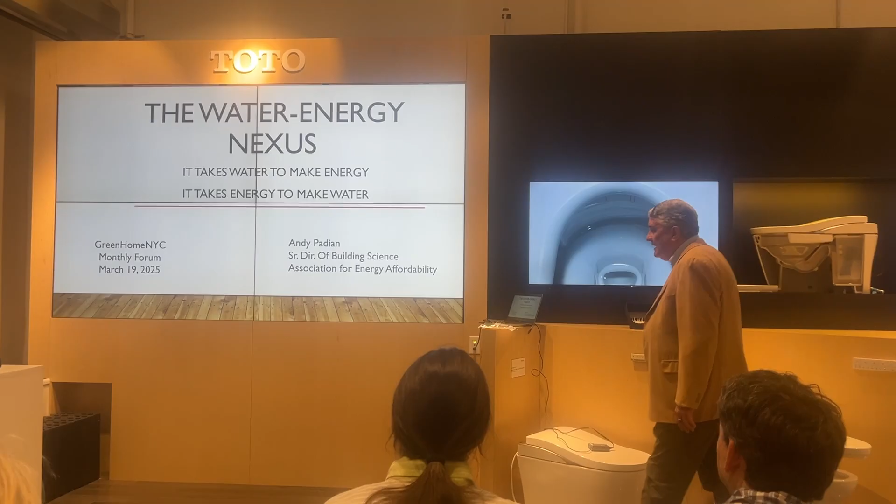I'm going to do a lot of stuff tonight, going at about 100 miles an hour. This is one of my favorite presentations to do because the connection to water and energy is very important. This isn't a class about water efficiency in buildings, although I'm going to talk about it. And it's not a class about electricity, but I am going to talk about it. I'm going to talk about where those merge all over the place.

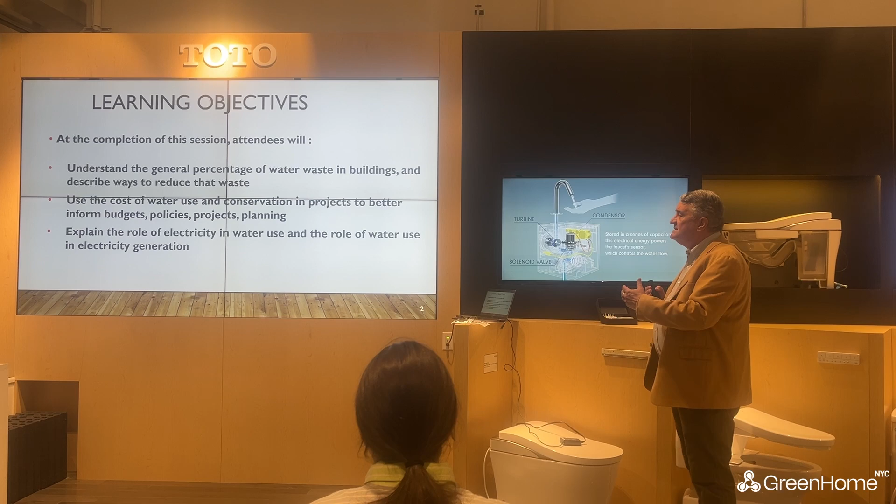You're going to understand how much water waste there is in buildings tonight because I will talk about water, the cost of water, conservation, and how to better inform budgets, policies, and projects and planning. I don't ever see water addressed in refinancing, and it's stupid. I'm going to explain how electricity is involved in water and how water is involved in electricity. And I'm going to start making you really depressed and very guilty so you know exactly how much water is used in every single thing you use in your life.

I've been in the field for about 20 years and I hold the world record for multifamily ASHRAE Level 2 audits. No one's done more than I have. I've thrown the gauntlet down and no one tries to pick it up. I do presentations and articles all over the country. I'm speaking at the Building Performance Conference in New Orleans, Louisiana next month. I helped create most of the Multifamily Building Performance Institute trainings and certifications, and I train on them all the time. I'm a huge proponent of energy and water efficiency.

I always like to find out who's in the room. So who are you? What do you do? Quick start, name, rank, serial number. Go.

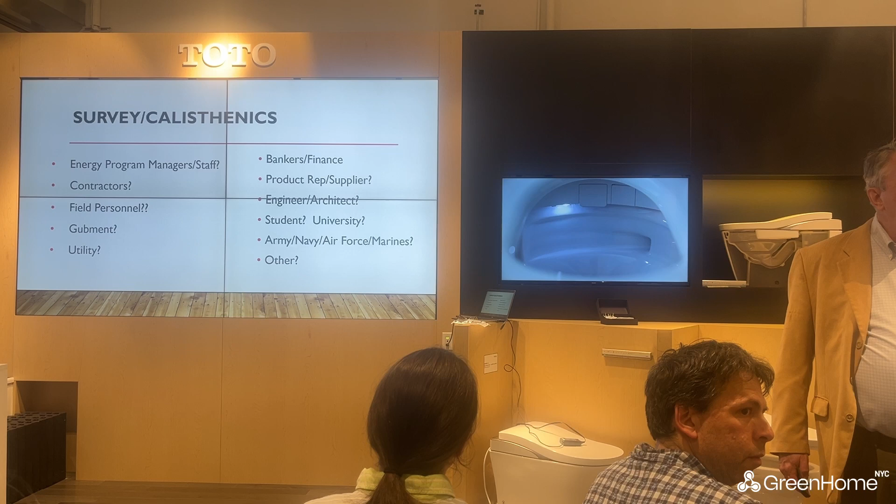Gregory, project manager. Lorraine Julio, HVAC contractor. Lydia Reynolds, associate manager of Clean Pipe, Climate Justice, and Climate Innovation. Program manager for the County. Gabriella Rada, energy engineer, currently on the grant and transitioning to EA as a sustainable specialist. Mom and Kelly Carpini, I work for an asset manager that focuses on ESG. Eli Greenberg with Kelvin Systems, formerly Radiator Labs, we decarbonize buildings. Dallas Panier, I work for the Association for Energy Affordability, energy efficiency for affordable housing. Katya, government consultant. Scott DeVere, principal of DeVere Architecture. Jill Baker, I write for Reuters. Monsi, sustainability strategy at a transportation company. Eric Natch, student at Hunter College, working in environmental planning.

Anybody former Army, Navy, Air Force, Marines? The number one training area for sustainability in the United States comes from the Army, the Navy, the Air Force, and the Marines.

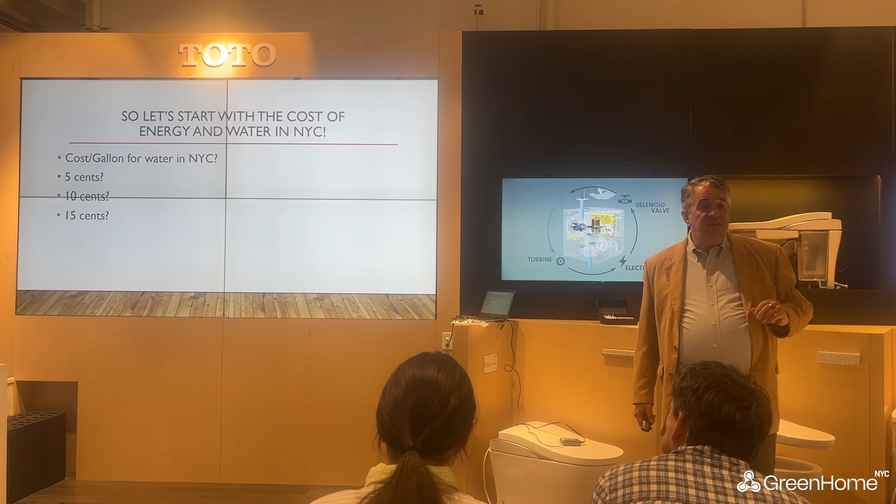So let's start with the cost of energy and water in New York City for all you sustainability gurus. What's the cost for a gallon of water in New York City? Is it 5 cents? 10 cents? 15 cents? How many think 5 cents? How many think 10 cents? How many think 15 cents? Survey says 1.67 cents for a gallon. Why don't we know that off the top of our heads?

Okay, let's go to a therm of gas in New York City. Does it cost 80 cents? How many think 80 cents? How many think $1.20? How many think $1.50? I've seen both answers. Okay, how many think $2?

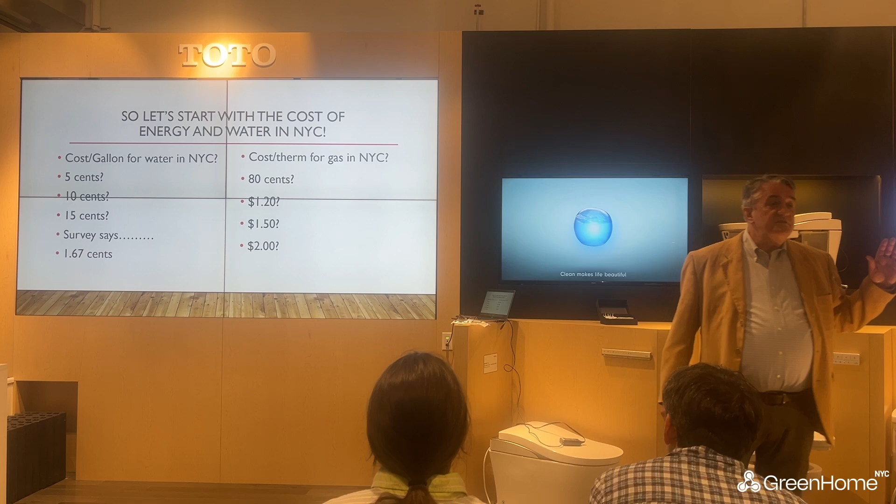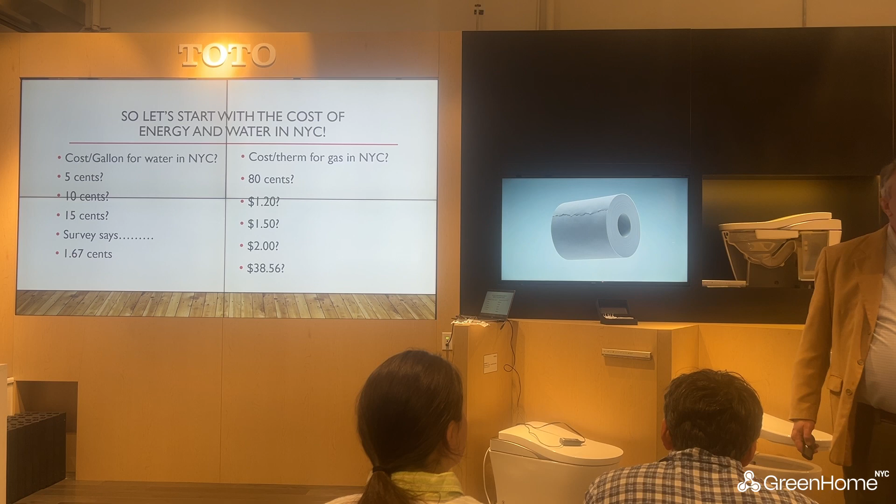How many think $38.56? The correct answer is all of the above. It's 80 cents if it's interruptible gas in Brooklyn, $1.20 if you're a multifamily contractor, $1 if you're a multifamily owner, and $1.50 to $2 for a residential building. I use 1 to 4 therms of gas every month for my little gas stove, and no matter how much I use, I get charged $38.56. So on those months when I use 1 therm and don't cook much, gas is pretty expensive.

The cost per kilowatt hour of electricity for a single family home or apartment in New York City is... how many think 15 cents? Get out of the solar business. I don't know what you're talking about, I haven't been in New York City for a while. How many think 20 cents?

Do you pay an electric bill in New York City? No, I have solar on my roof. But that's what I thought it was anyway. How many think 25 cents? Do you have a Con Ed bill? You ever read it? Not close.

Okay, so you work for an energy hub. Okay, 30 cents? Survey says? What, you think 30 cents? No, I'm sorry, it's 35 cents. 35 cents, very good. It's very good for you to give the answer at the end that's correct. Okay, that's good.

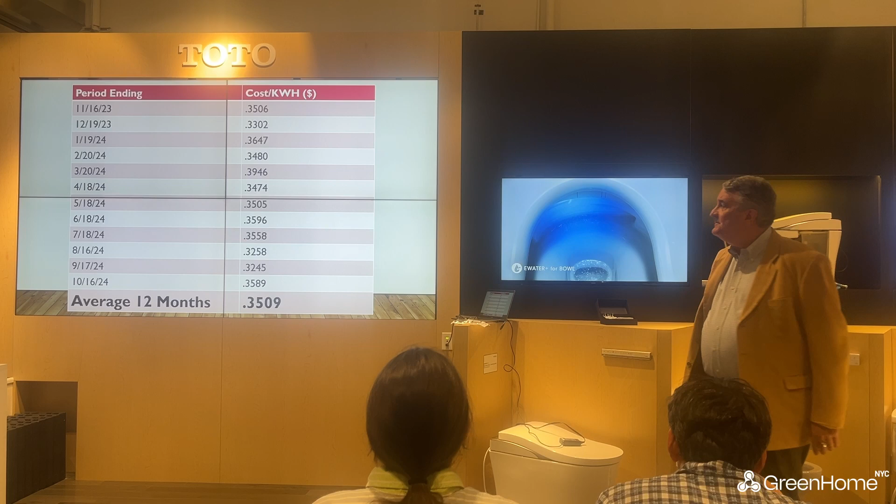So these are my electric bills for the last year and how much I paid per kilowatt hour, taking off the meter charge, which people tell me I can't do. If I add the meter charge, it goes up another 10 cents, because I don't use that much electricity since I'm an environmentalist. I'll get more into that in a minute. So electricity at 35 cents a kilowatt hour.

Harris, you were telling me that somebody you know got a heat pump and they said, oh my God, my energy bills went up by... I don't know what the net increase is, but they're paying $300 a month for heating.

That's because electricity at 35 cents a kilowatt hour is the same as gas at $10.35 a therm. It's the same as number 2 oil at $13.85 a gallon. Just saying, our energy's kind of expensive and we don't pay attention to it. And some of the people preaching electrification, which is different from decarbonization, won't tell you these numbers.

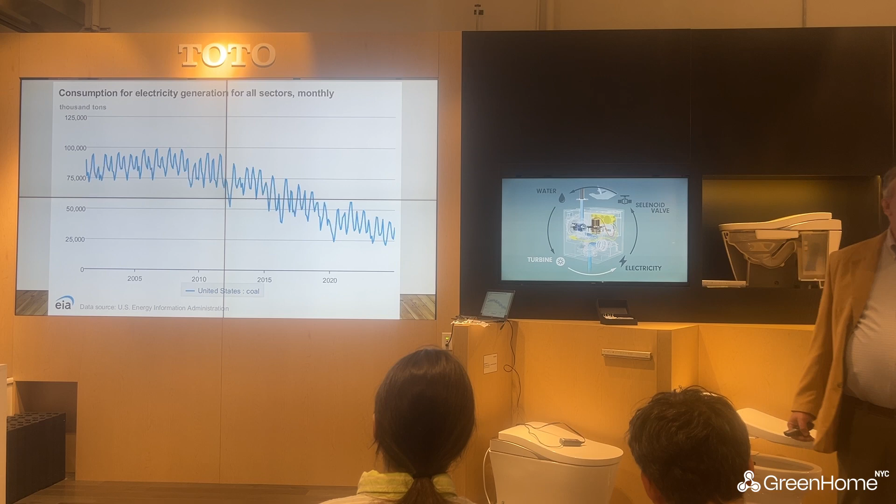So electricity over the last 25 years, overall usage has been going down nationally. I picked this up from the U.S. Energy Information Administration this morning. We're using less electricity because of efficiency. Huh, who knew?

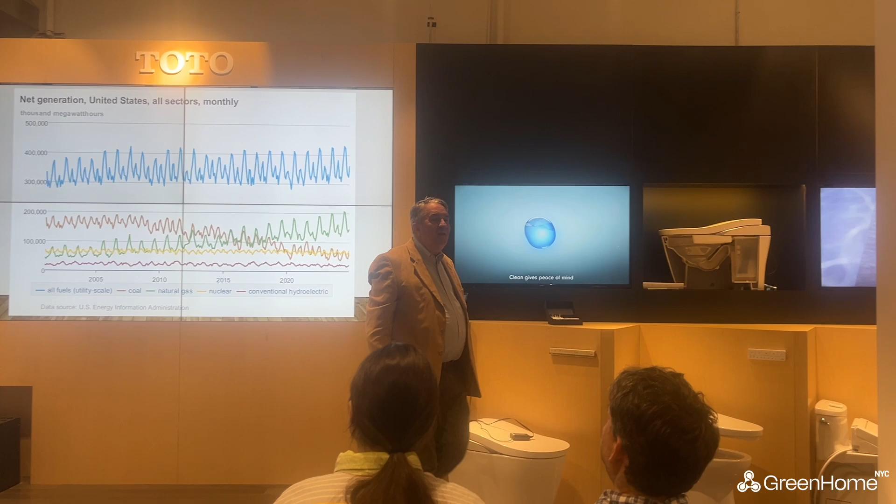But in the United States, if we look at all fuels - coal, natural gas, nuclear, hydro - oh, we're not really a green grid, are we? No, but everybody tells us the grid is greening. Did anybody know the contract to bring hydroelectric power from Canada to New York City was canceled? Oh, so we're not going to get that cheap hydro. And by the way, the Canadians are really pissed at this guy named Trump, and they're saying all the hydro they give us right now, which makes my electric bill 35 cents a kilowatt hour, they're going to kick a 24%, 25% kicker on it. So my electricity is going to go from 35 cents a kilowatt hour to 50. Because the guy in Washington pisses off a lot of people.

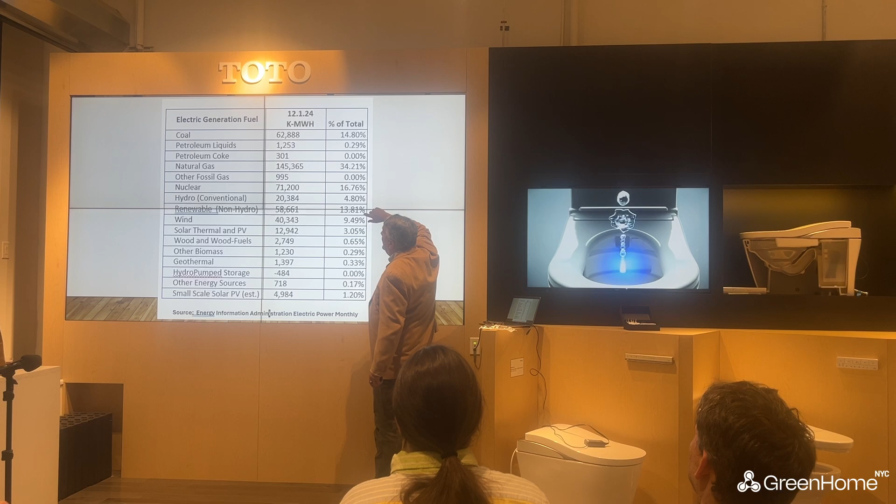Okay, so as of today, the Energy Administration says coal is 14% of our electricity, natural gas is 34%, nuclear is 16% - that's a big chunk. Non-hydro renewable is kicking up but it's only 14%. Wind is 10%. These are good numbers to know, but we're still under 25%. That isn't good. They've been climbing the most ridiculously of all of them. Small scale solar PV is 1.2%.

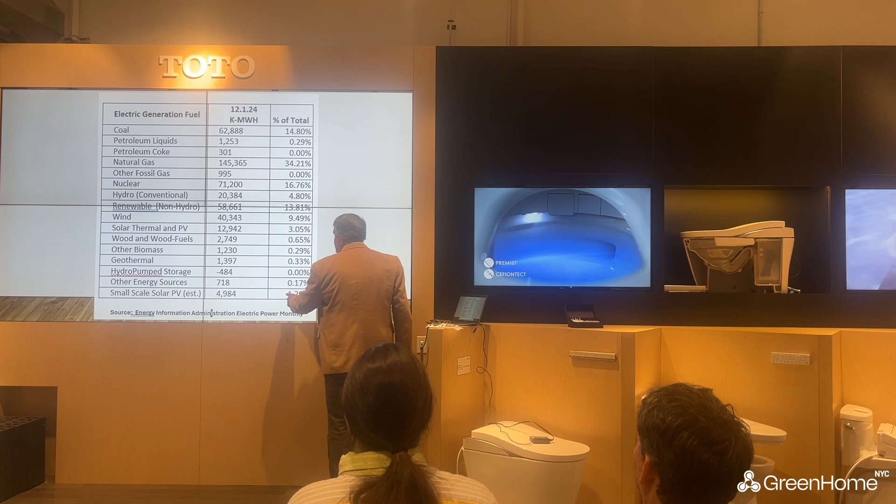So if you go to the Department of Energy website today, you can't get any information from the Department of Energy, but you can hear the speech that the new head of the Department of Energy gave to the new employees. And I can summarize it in 2 sentences: drill, baby, drill, more nukes, less kooks. And that's it. Efficiency was never said.

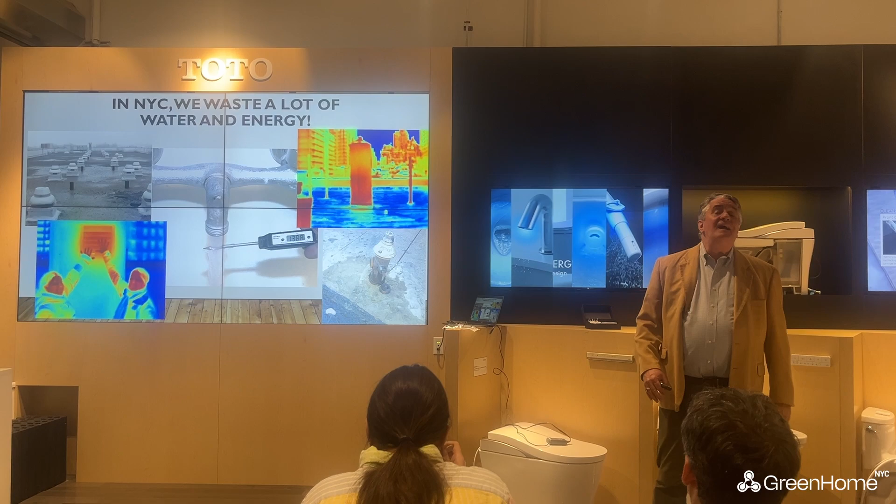Alternatives were never said. So in New York City, we waste a lot of water and energy. We have ventilation fans on the roof dumping warm air into the atmosphere. We have dumbwaiter shafts, which people tell me they shouldn't seal on top of our old buildings, that are basically heat vents. We have water coming out of the tap at 138.8 degrees Fahrenheit. And open hydrants - see them all the time, not just in the Bronx where I work, but on my street in Hell's Kitchen where I live.

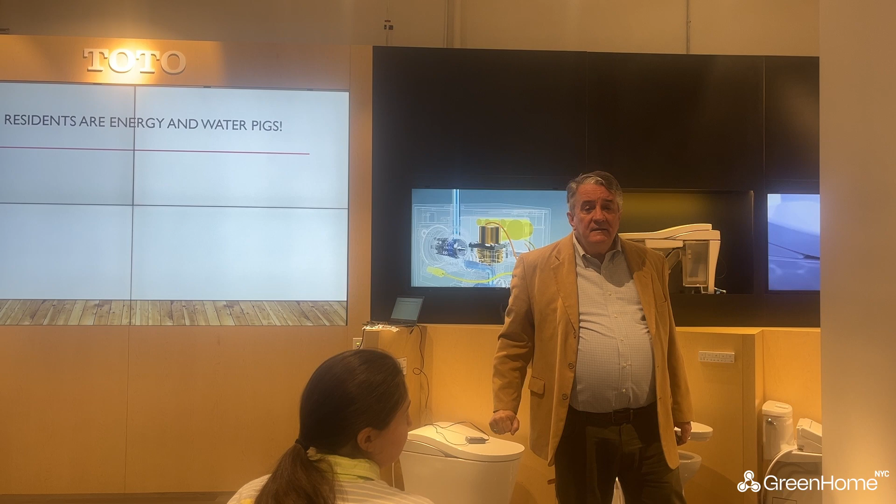We're pigs. Anybody know how much electricity they use each month? Nobody looks at that. How much? 240 kilowatt hours. What the hell are you running? 5 refrigerators? Electric hot water heater. Oh, that's it. Got to get rid of that. Okay.

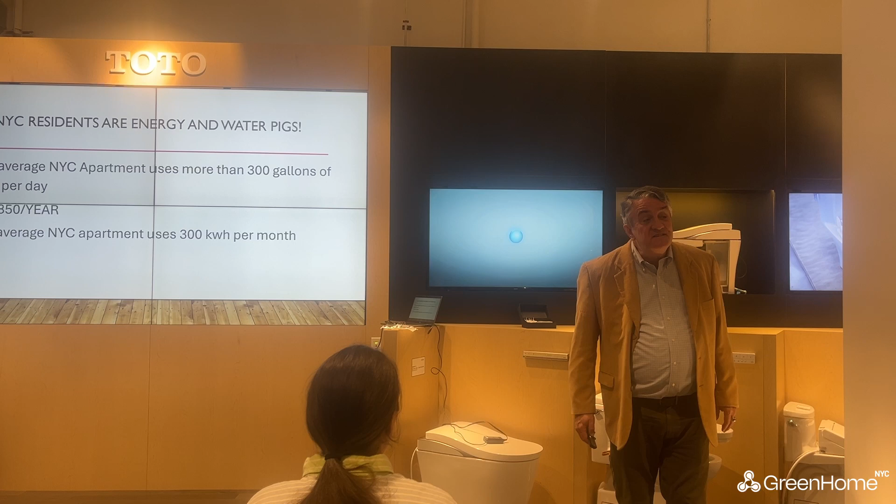The average New York City apartment uses 300 gallons of water each day, that's $1,800 a year. The average New York City apartment uses 300 kilowatt hours per month. I never use 100 because I shut stuff off. And I unplug my router because your router uses as much electricity as a small Energy Star refrigerator. That's why the cat likes to sit close to it. That's 300 kilowatt hours a year, that's $1,500.

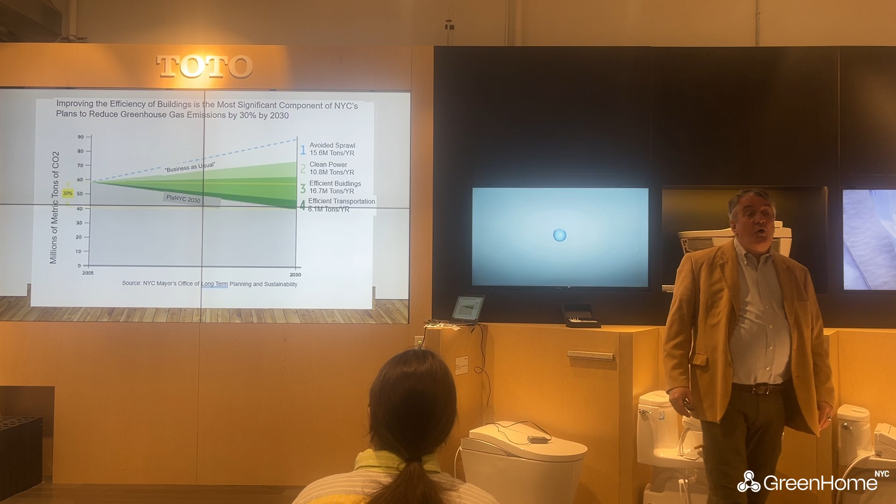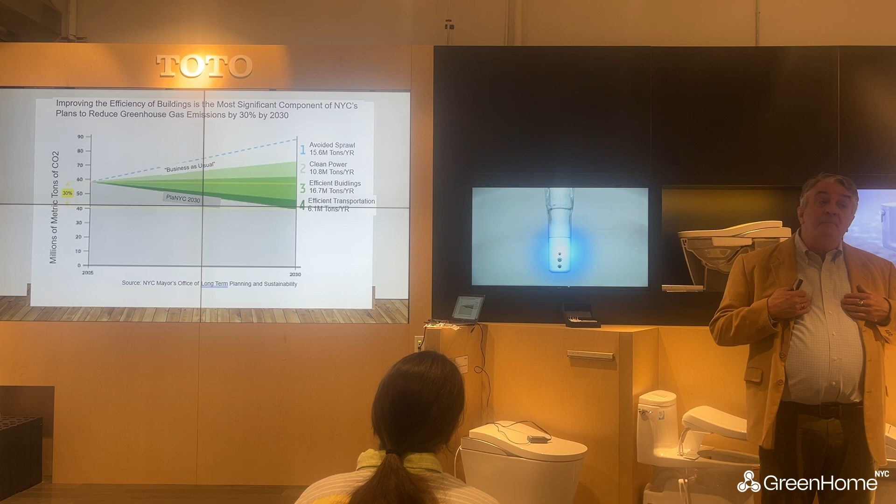But the mayor's long-term planning and sustainability office said that efficiency is the most important thing about getting to decarbonization. Unfortunately, in Albany, we've got people that have introduced a bill to preclude us from giving gas to buildings that currently burn oil. The number one way we reduced carbon in New York City over the last 10 years is getting off of oil. But the Albany enviro people, I'm an environmentalist, but don't tell people they have to get off gas until you give them cheap electricity, because it's too damn expensive.

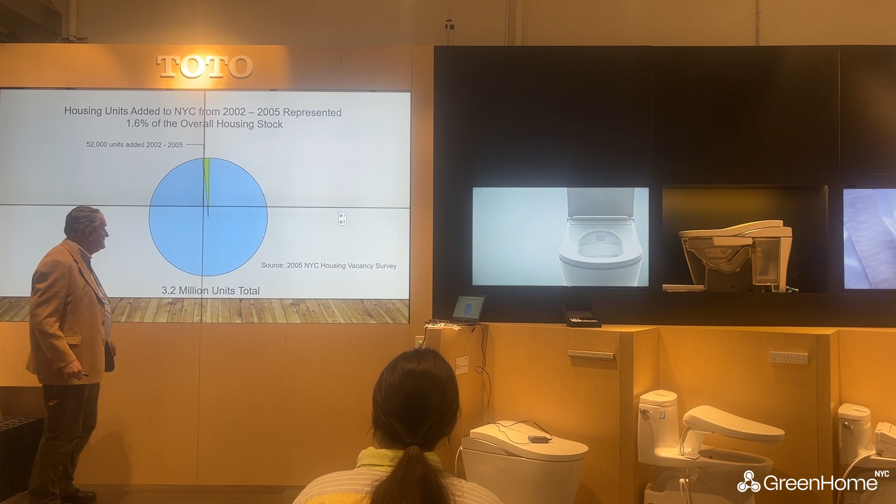People tell me, oh, but we're building super efficient buildings. From 2002 to 2005, we added 52,000 units of housing. There were 3.2 million total. And the Department of City Planning says from 2005 to 2030, the new stuff we add is only going to be 7% of our housing. Who is investing in retrofit? Who is investing in rehab? Answer, no one. Everybody tells me this is a LEED building, it's going to be fabulous, it's going to be fantastic.

Well, the tallest LEED building in the city, the Bryant Park building on the corner of 42nd Street and 6th Avenue, is the Bank of America building. It's LEED Platinum. It's also the 4th highest user of energy per square foot of any building in the city. So LEED doesn't do its job. It's about bike racks and solar panels. Yeah, it's a bunch of crap.

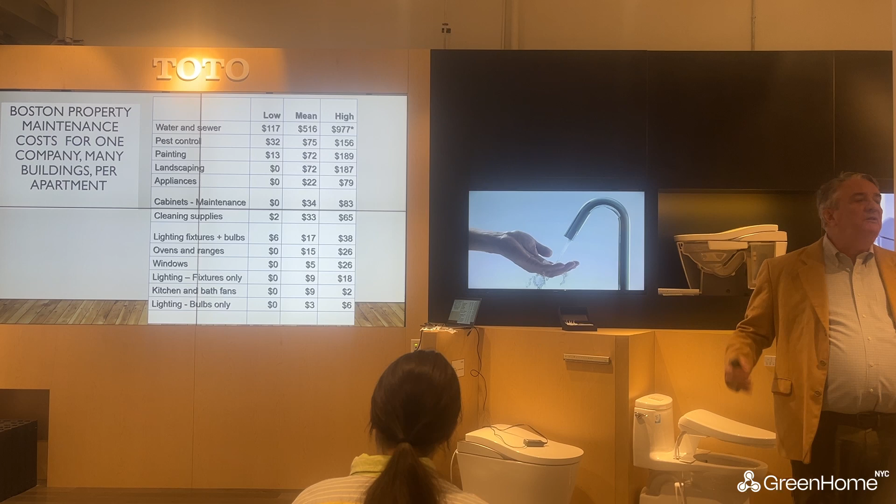A few years ago, a friend of mine who was a health and safety expert went to a managing company in Boston and asked how much they pay for everything in their buildings, per apartment. They found the low and the high is about a 7 to 20 to 1 difference all the time. But she wanted to look at water, pest control, painting, landscaping, to see if people were spending a lot of money on that, and whether health and safety problems and asthma were worse in those buildings. You know what she found out?

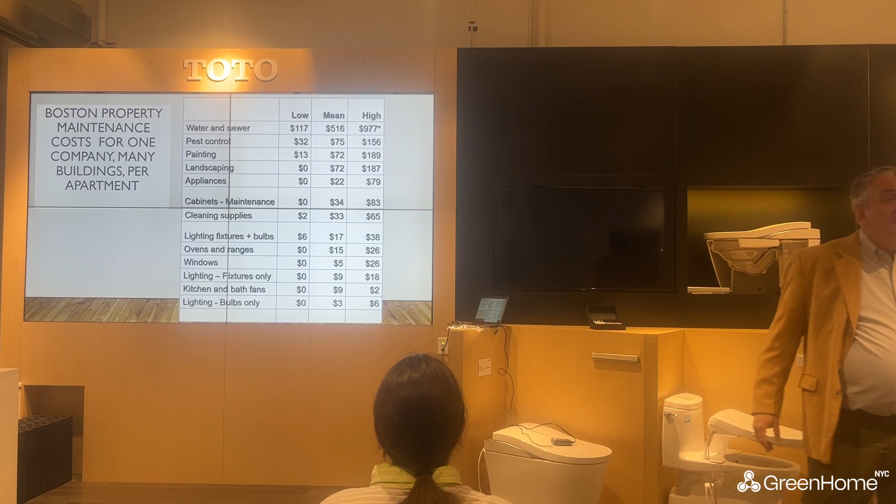In buildings, the difference in water costs was $117 to $977 per apartment per year. This was 15 years ago, and she's a health and safety expert. So she's walking around the building with the super at the high-cost building, and there was a hose in the backyard running 24/7. She said, hey man, maybe you should shut that off. He said, oh really? Yeah, that's a good idea. These are the things we're missing in buildings.

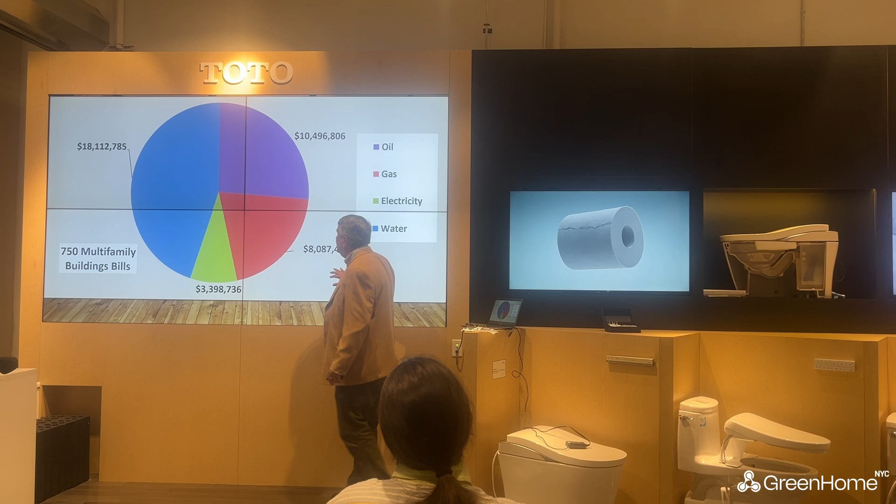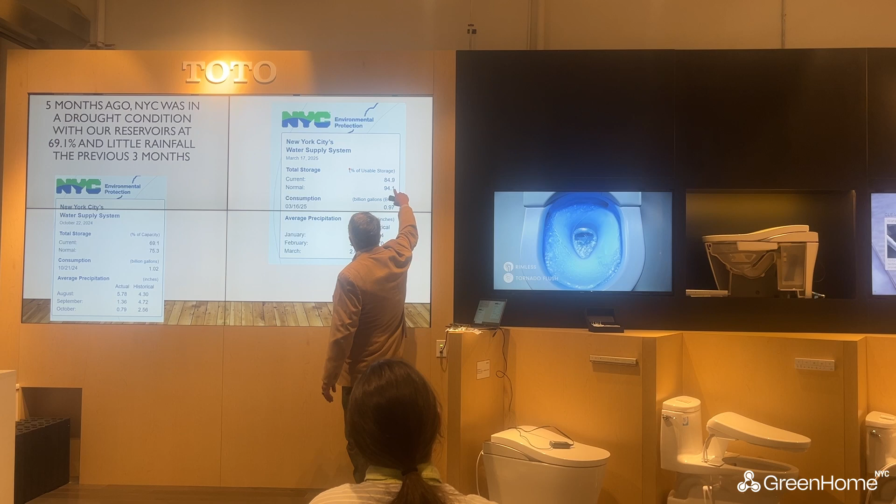5 months ago, New York City was in a drought. I did this presentation, and we were at 69% of capacity. But every time I went to a restaurant, they gave me a glass of water. Pardon me, WTF. If it's yellow, let it mellow. If it's brown, flush it down. Reduce your water use a little. Okay, now our current level is 84, but it should be 94. I'll talk about our reservoirs in a minute because they're an engineering marvel. But rainfall is 43% down from what it normally is. This is bad, and we're not saving water.

The mayor made a big stink about it a few months ago. I have a community garden, and because of the drought, he wouldn't let me use my charcoal grill. Yes, it's charcoal, I'm very sorry. It adds terrible things to the environment, but the food that comes off it is really good.

So the water and sewer fees, we're charged $3.81 per 100 cubic feet. That's about 750 gallons. But you also get charged sewage costs, and that's 159% of that. So it ends up being about $6 per 100 cubic feet or 750 gallons. I'm sorry, it's $9.80, or 1.3 cents per gallon for water.

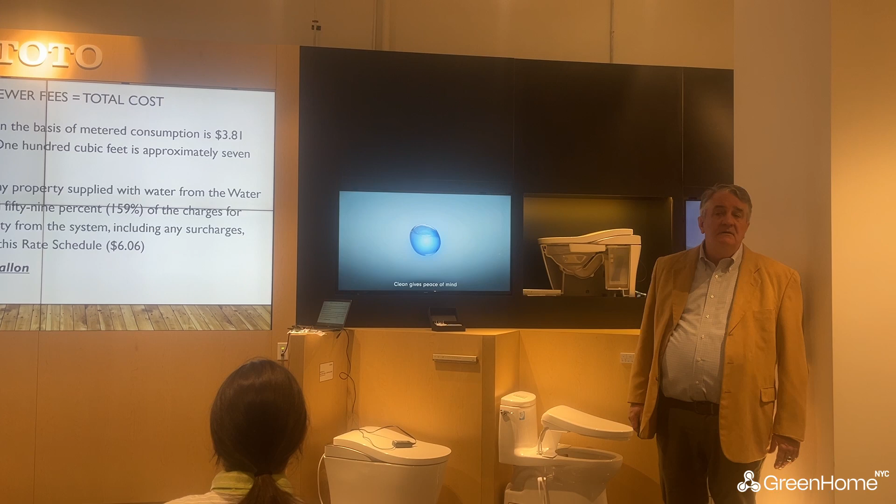And y'all go out and buy water, how many people have a bottle of water with them? New York City water is so much better than any bottle of water you buy. You're just, pardon my pun, pissing money away, not drinking New York City water.

So the major uses of potable water are toilets. Welcome to Toto. They make super, super, super efficient toilets, and I will talk about the efficiency of their toilets in a minute.

Showers are number 2. Sinks for washing dishes are number 3, because we don't have dishwashers in New York City. Because every building owner says to me, my tenants are insert race, color, or creed of person, and they're animals, and they'll break a dishwasher. Every owner tells me this. For new affordable housing, I said to them, hey, dishwashers are cheaper than kitchen cabinets. They started putting dishwashers in as a money-saving device, but it saves a lot of water too.

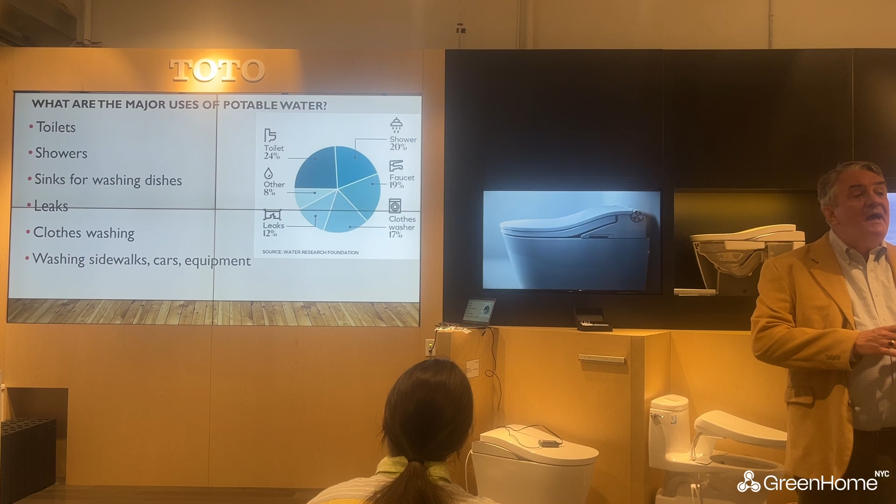Leaks, clothes washing, washing sidewalks. NPR told me this morning that 33% of the apartments that are rented right now have a washer dryer in. How many have a washer dryer in your apartment? Yeah. Oh, really? Is it a heat pump dryer?

What's that? So you put the clothes in, and 4.5 hours later, the clothes are still wet, right? But I have solar and I have batteries. That's my specialty. So, okay. But the heat pump dryers don't dry your clothes. I wouldn't use one, I just air dry. Right, you need to be careful with that because that's adding a lot of moisture to your apartment.

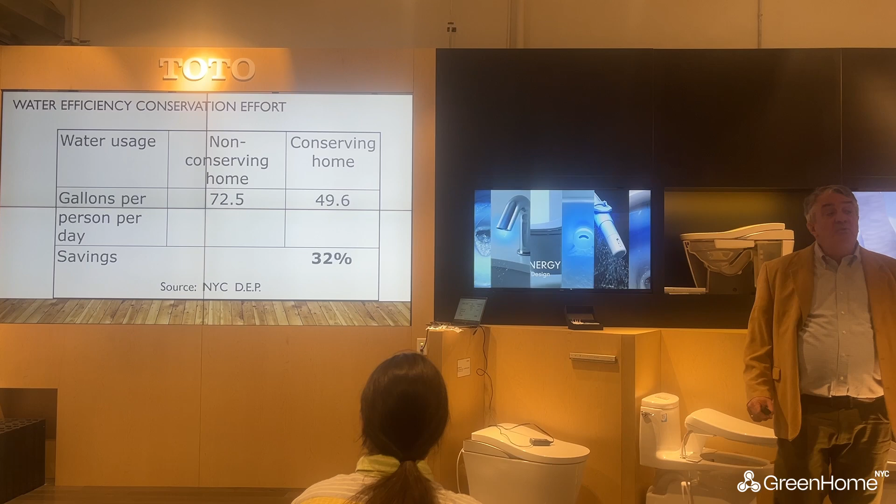But anyway, washing sidewalks and cars and pools and gardens and lawns, that's not too much in New York City. But very simple conservation efforts, just thinking a little bit, reduces you from 72.5 to 49.6 gallons per person per day. So we can get 32% savings in water just by being smart, like when you're washing dishes, turning the water off, not running it for 20 minutes solid.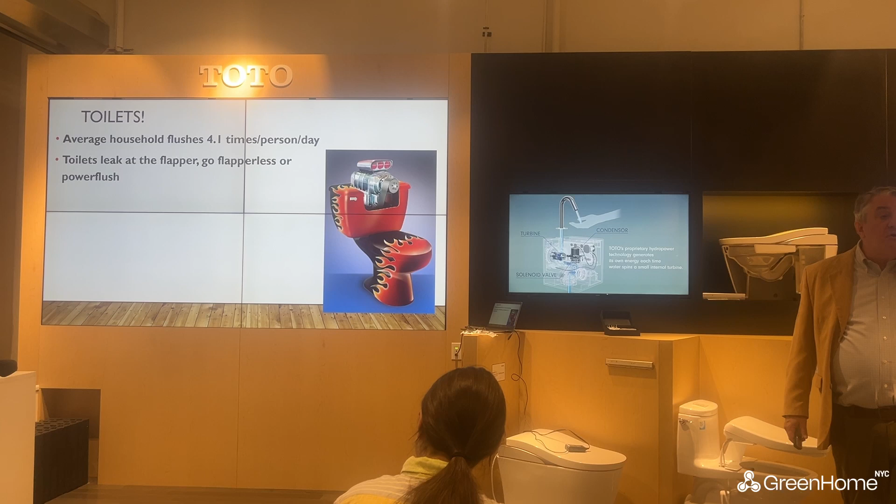The average household flushes the toilet 4.1 times per person per day. Toilets leak at the flapper. I was in an affordable multifamily building the other day, walking through with the owner of the building, and as I'm walking, I heard the toilet go, shh, and then stop, shh, and then stop, shh, and then stop.

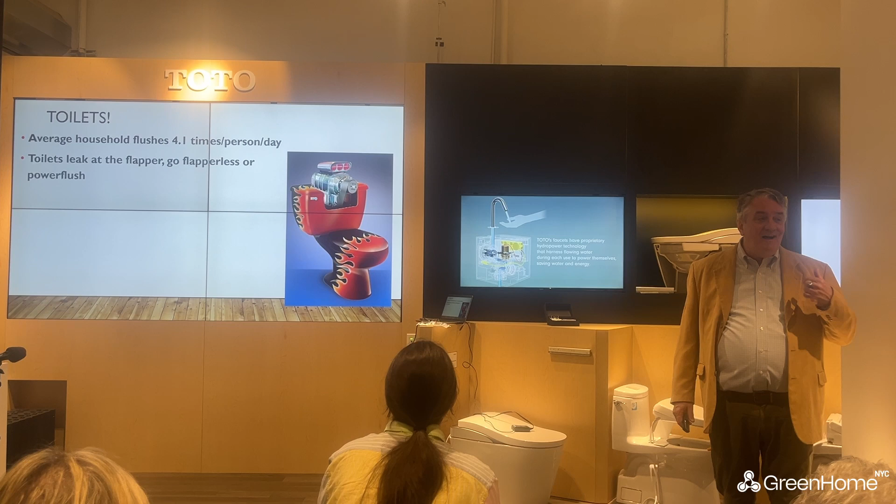I said, do you know that costs you $2,000 a year? And he said, oh, no, it doesn't. I said, I'm the professional here, you're not. You've got 80 violations on your building. You've got rats in your building. And I'm trying to save you a little money, and you're not listening to me.

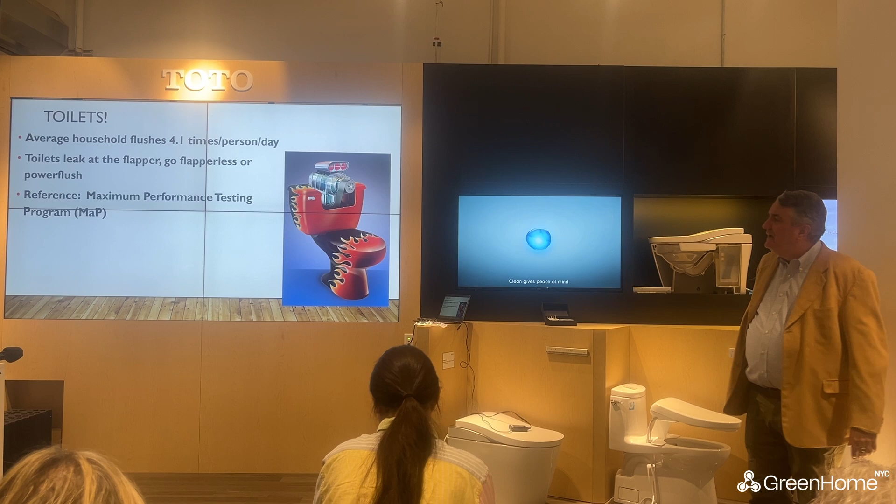The maximum performance testing program was introduced in the late '90s, early 2000s. This Canadian guy and this California guy said, I don't think toilets work. So they checked. It's a joint study between a guy from the US and a guy from Canada, it has nothing to do with the governments.

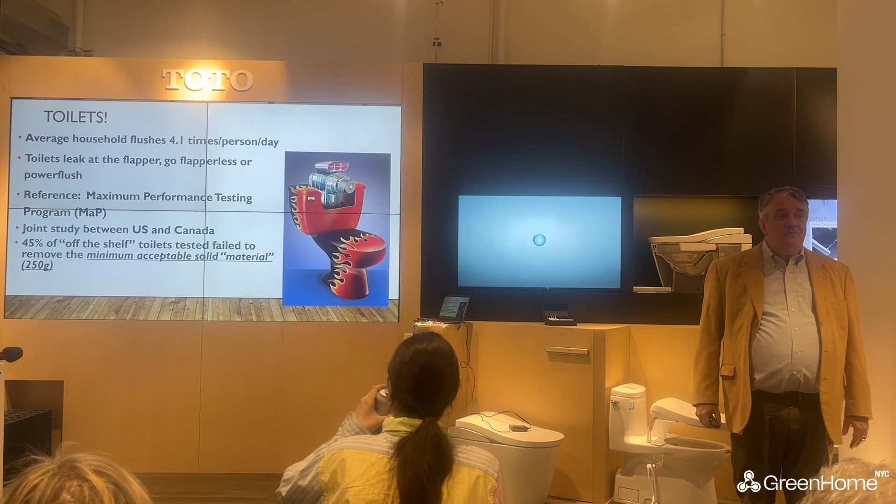45% of off-the-shelf toilets tested failed to remove a minimum acceptable solid material of 250 grams. That's 250 grams, about half a pound. Yeah, you have to think about poop for a minute. Okay, let's think about poop for a minute. The performance ranged in toilets from 100 to 900 grams. Every toilet in the showroom performs over 1,000 grams. That's what we want in every toilet.

It single-handedly changed the market. Tonight I came in and asked, what's the MaP rating on your toilets? And I hear, over 1,000, every toilet. That's great, that's a well-performing toilet. All these toilets are 1 point something gallons, maybe 1 gallon per flush, and they don't have a flapper, so they don't leak at the flapper.

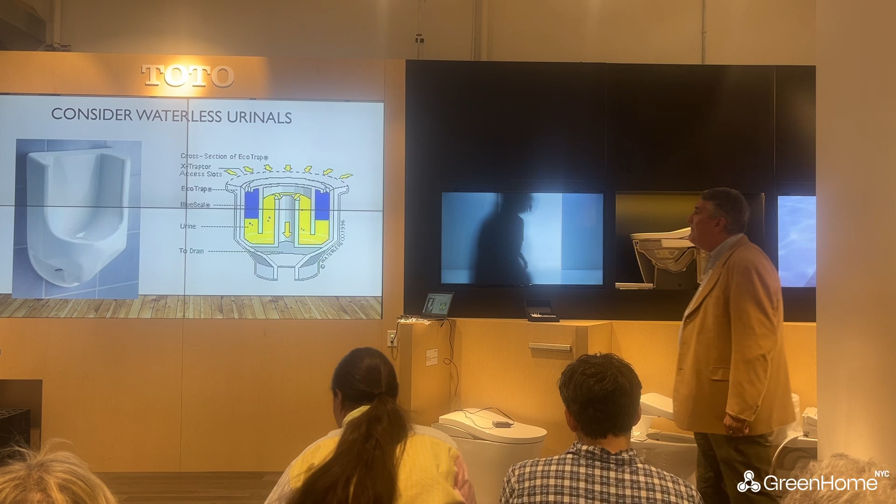The building that performs the most amount of training for Local Law 97, Local Law 94, and Local Law 84 - I went into their bathroom recently. Ladies, you may not be familiar with this, but this is a urinal, it's for gentlemen to stand up and pee. There's a sign over the urinal that says, please hold the flush button down for 10 seconds. This is a place that's training us all in how to save money, energy, and water. Maybe they could get waterless urinals that work without using water and only need to be cleaned nightly. What a good idea, but did anyone do it here?

And they're like, no, it's a city building. Let me explain something to you. If you work in a city building, all you do is have a plumber come in at night and change it when nobody's watching. Then they come and yell at you, because it's easier to get forgiveness than permission.

I went to a New York City Housing Authority building 5 years ago, and the highest ranking sustainability person there said to me, all of our toilets are under 2.5 gallons. Well, no - this is a 6 gallon one. And if you pick up the top of the toilet and look at it, it tells you what year it was manufactured. So, happy 67th birthday toilet. And that's a toilet that's just wasting water all the time.

This building had 17 apartments, and the owner sent snail mail to all the tenants saying, what's up, tell us where the leaks are, our water bills are really high. I heard about this and said to the owner, it's your toilets. He said, no, it's not my toilets. I said, how do you know? He said, my plumber says our toilets are fine. I said, how old's your plumber? He said, 82.

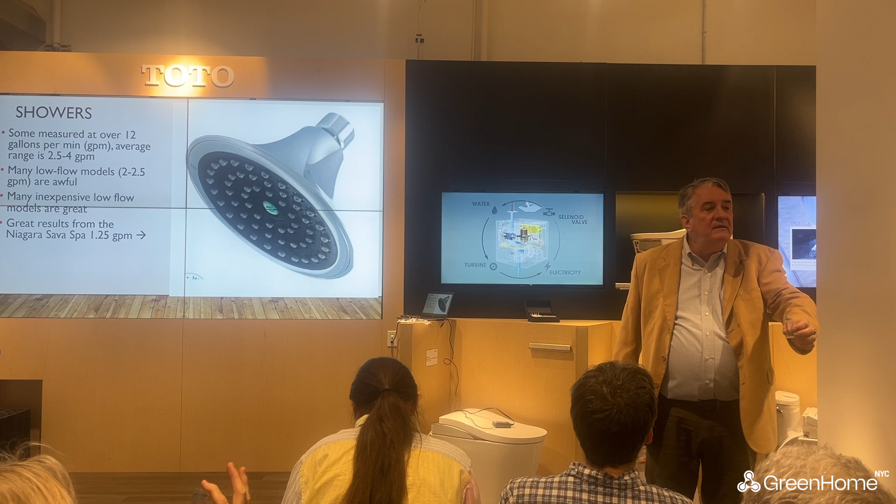Everybody get a toy tonight? What is it? It's a drip gauge. If you go into a building where the water's running, you put it underneath - 1 drop a second is 5 gallons a day.

You didn't get one? I'm terribly sorry. Oh, you need one. Yes, right - would you like 10? I have 50, I just don't like that. I'm leaving the rest of them with Toto tonight.

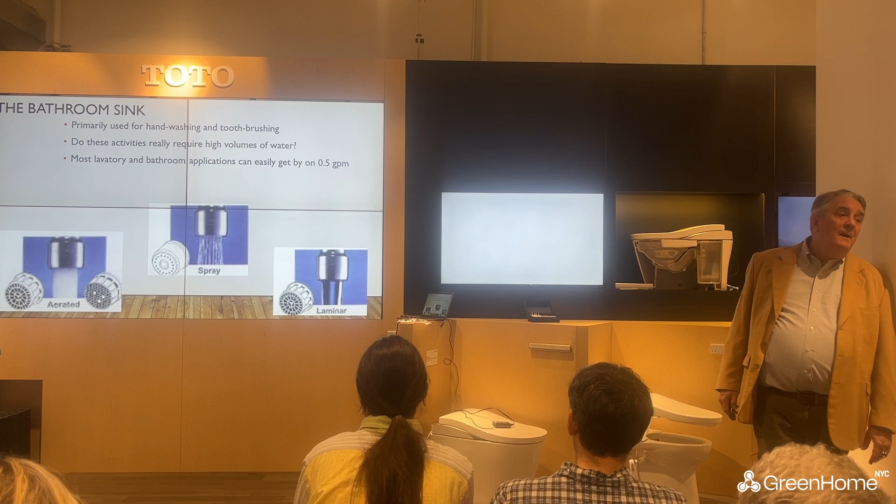Most lavatory and bathroom sinks can get by on half a gallon per minute, but I did energy audits 3 years ago of 9,000 units of housing. The average bath sink gallons per minute is more than the shower. What the hell? Architects specify this.

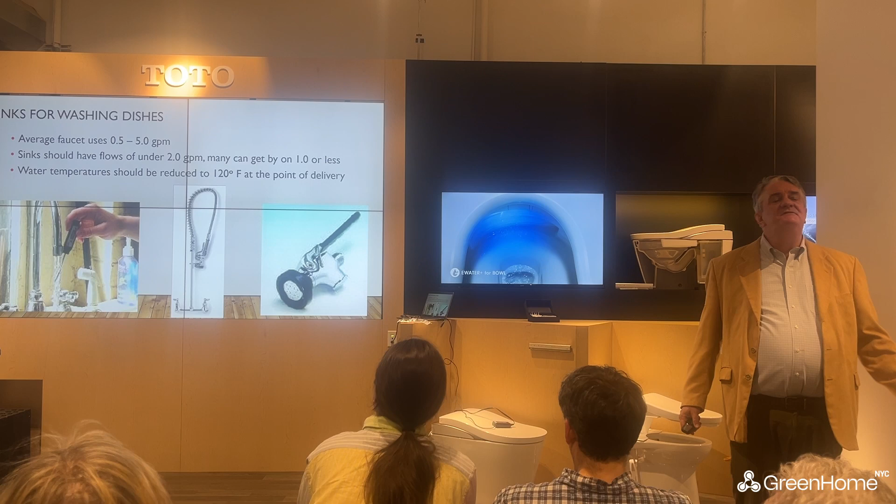If it's most of you, there's a bottle of water, a container of ketchup, and that's about it. So you don't use the kitchen sink to fill up pots because you don't cook pasta and you don't cook rice. This is the complaint of people when I drop their kitchen sink down to 1.5 gallons: it takes forever to fill the rice pot.

Okay, the pasta pot, okay, the bean pot, okay. I cook all the time and I've learned: turn it on and do something else. And watch it so it doesn't overflow.

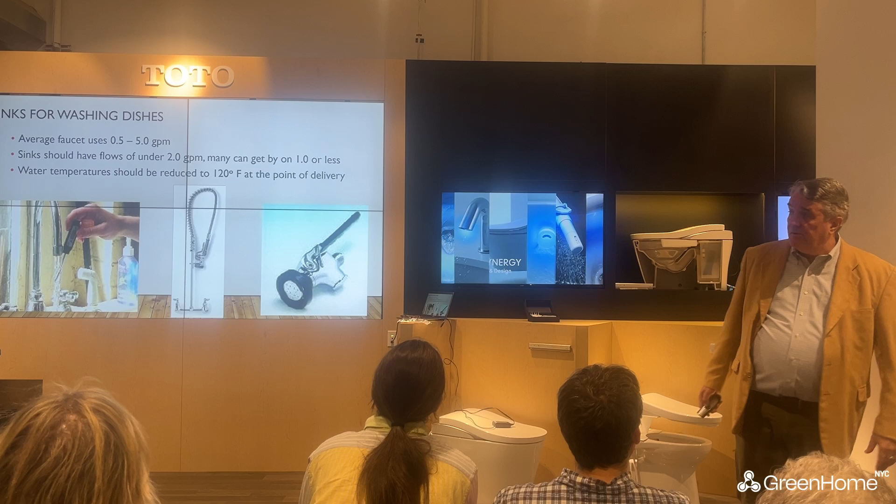Why should I have flows of 5 gallons per minute? The sink should be under 2, and the temperature of the water should be at 120 or less.

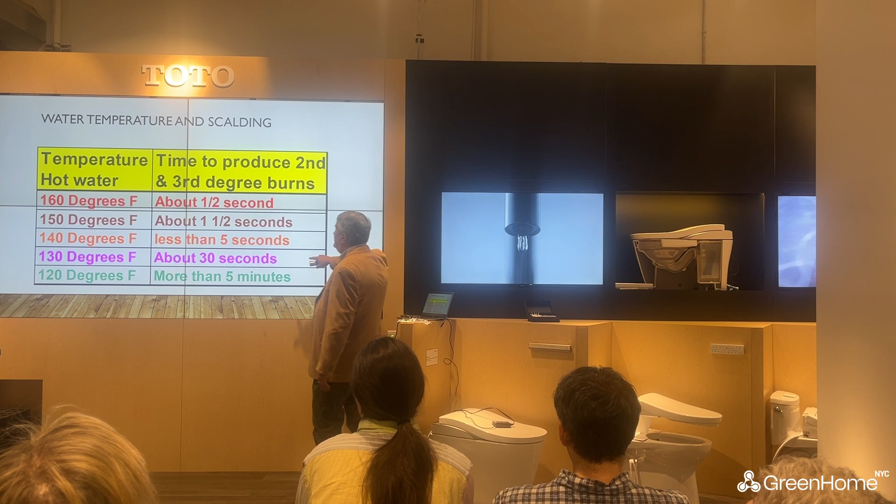Because I've measured water at 138.8 degrees at the tap. Yeah, that would burn human skin, 2nd or 3rd degree burns in about 30 seconds. 140 degrees in 5 seconds, 150 in a second and a half. This isn't 'ow,' this is 3rd degree burns, see you in the hospital.

And if a child gets burned by the average owner in New York City and I testify against the owner, that owner is going to lose big time. Because the architects and engineers specify crappy equipment instead of keeping the water at a safe temperature, which is very easy to do.

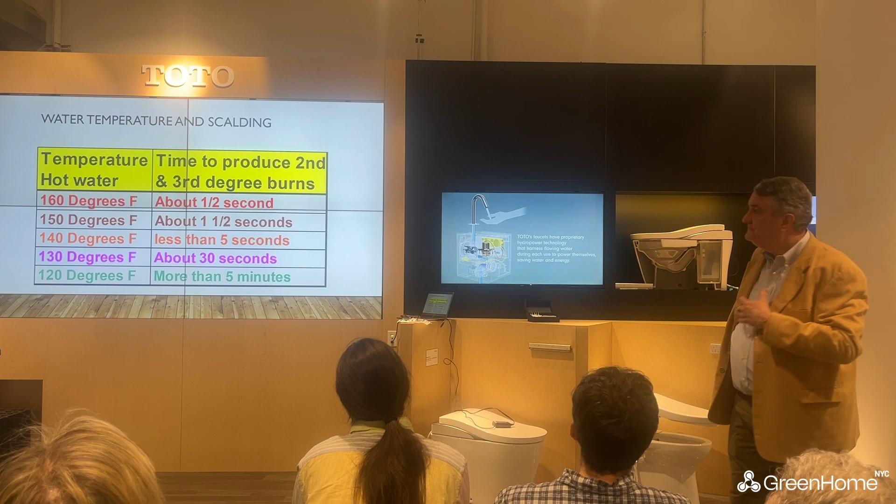DEP, the New York City Department of Environmental Protection, has a water conservation program because people just use too much water, and owners of affordable housing said, well, we can't afford to do this. Well, you could afford to change the toilets, put in aerators, and change the shower heads, but instead they complained. So they got a deal in their buildings: if they install low consumption plumbing hardware and fixtures, the fixed charges will not go over $1,285 per year. That assumes 76,000 gallons of usage in an apartment, or 208 gallons per apartment per day.

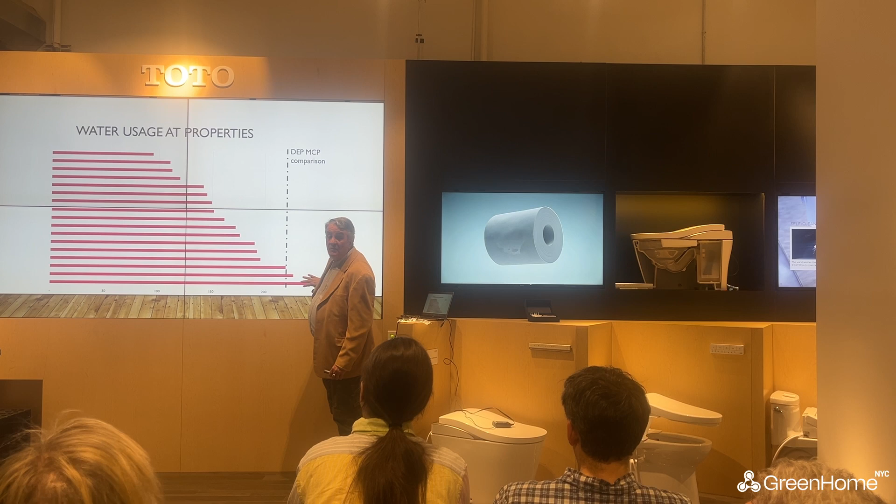Kind of hard to use that much. And when we looked at a management company who had signed on to this, these are their buildings that were in the multifamily conservation program. All of them were in. These were the only ones that were over. These were paying the city too much.

When you go back to the city and say, hey, I'm on the DEP MCP program and I want my money back, you know what they say? Nope, you signed on, you're stuck. So we've got a program designed for affordable housing owners who aren't paying attention to their water bills because they just ask for a subsidy, and they're... not very bright.

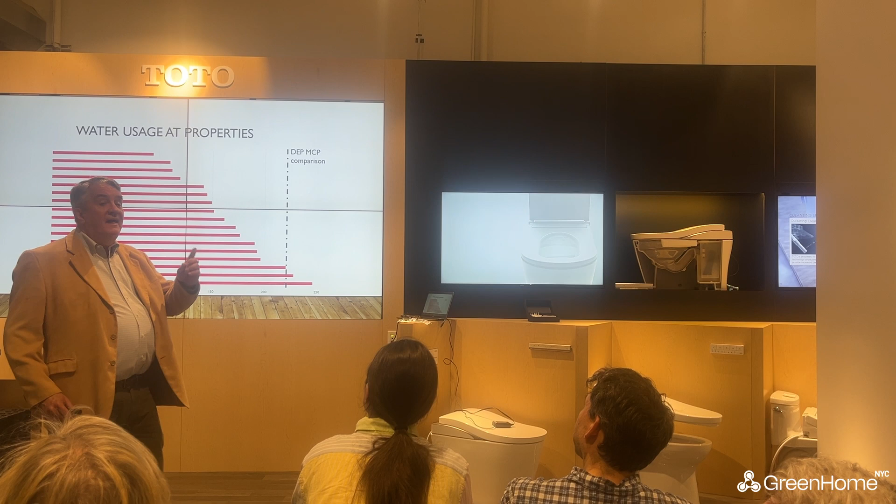I've done thousands of energy audits. This was in Canandaigua, New York. It's an all-electric building; the tenants pay their own electric. But the only gas is for the hot water in the building. This building is managed by the Archdiocese of Western New York, and I was raised Catholic, so I can make fun of the Archdiocese.

I stood looking at this, and saw a brand new hot water maker right next to a 30-year-old one. I stood and looked at it, and the head of engineering of the Archdiocese was behind me, and I said, pardon my French, 'What stupid asshole specified this?' And he said, 'That would be me.' Because he wrote a spec that said, 'Replace with same.'

And that is the sin of the architecture, engineering, and specifying business all over the world.

So, in this electrically heated, individually metered building, we put a blower door on each apartment and made the apartments 24% tighter on average. The electric bills went down 25%. 24% tighter, 25% savings, interesting. The new gas hot water heaters replaced the older models, and low flow shower heads and aerators were installed. Get ready for this.

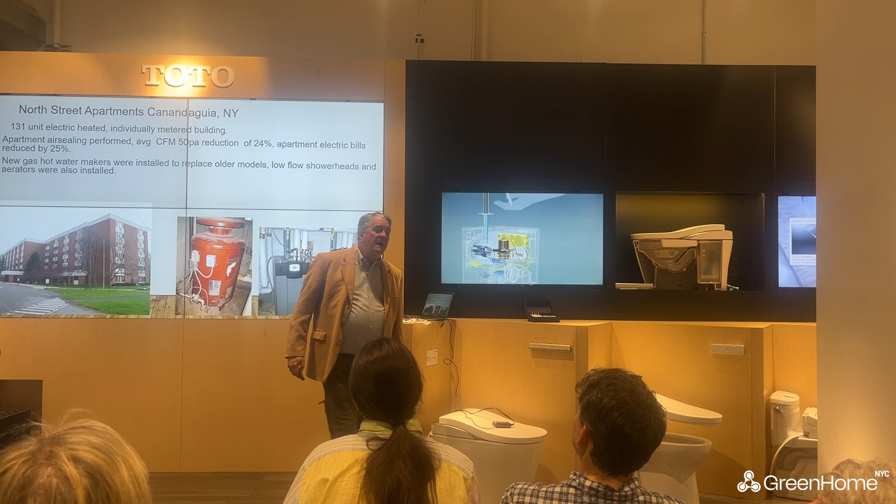46% reduction in gas use and 21% reduction in water use. Huh, that's pretty cheap.

Oh, and today that building's heat pump ready, for all of you heat pump advocates.

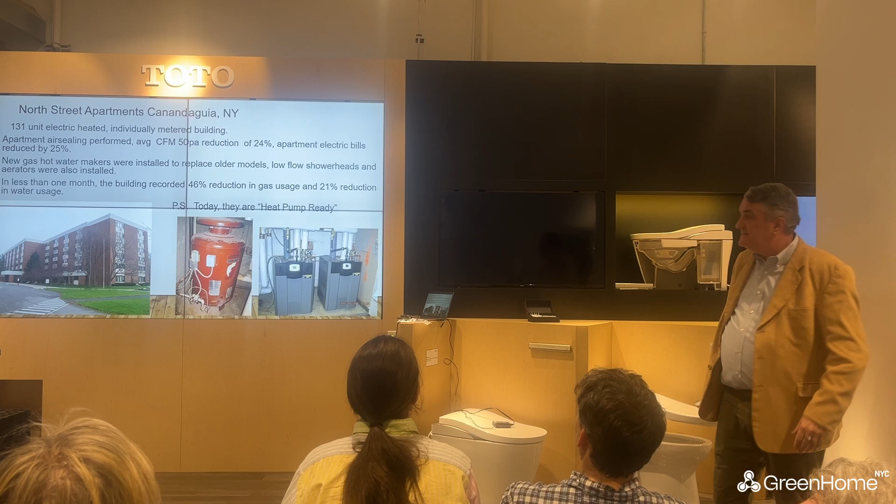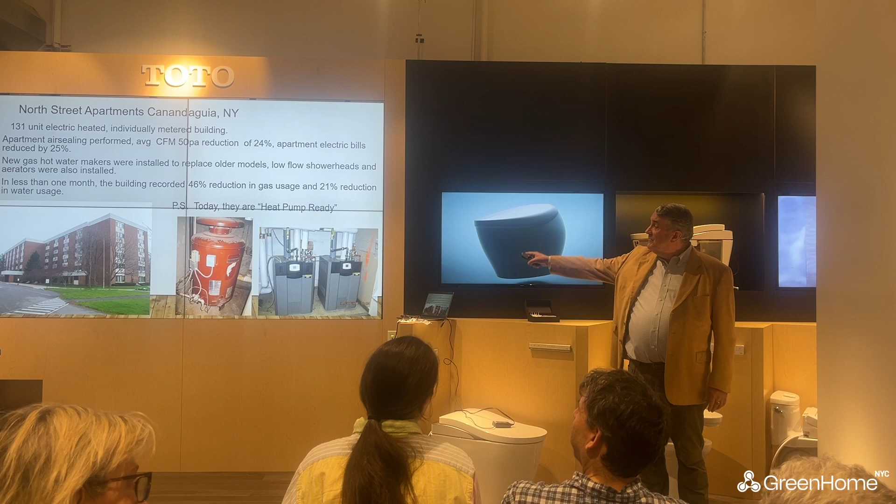Can we ask questions? Please. So if people are paying their own electric bill, why was the building incentivized to help with decreasing electric usage? Because they want to make life nicer for the tenants. I guess I'm not used to that, and we were giving them bags of cash to do it. This is very common - so they pay the electric bill themselves, but the water bill and the gas bill is paid by the building. They made big cash on this.

Dishwashers - a 2.5 gallon per minute faucet in a sink uses 25 gallons of water in 10 minutes.

I watch my friends wash dishes, and I want to kill them with my bare hands. The water runs, and I go over and turn it off. And they said, 'I'm washing the dishes.' I'm like, 'No, you're not. You're just running the water.' Soak the things up.

Energy Star dishwashers use 25% less than federal standards, and they're down between 5 and 10 gallons per load.

It's crazy. If you want to find leaks in the building, go down and look at the water meter at 3 o'clock in the morning. Or, in New York City, go online and look at it, and you can find it.

Fixing a leak - if a sink has a slow drip, that's 36 gallons a day, and that much per year. With a steady drip, that's 180 gallons per day, and that much per year.

Seeping, leaking, and running toilets - I'm one of those guys. I go into a restaurant and the toilet is running, and I roll my sleeves up and I fix the toilet, and I wash - don't judge me - I wash my hands.

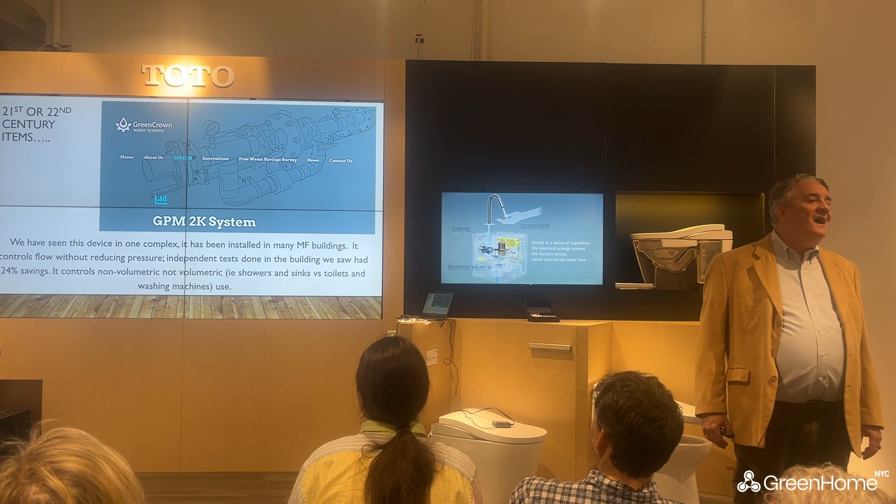In the 21st century, there's these things - manufactured by a company in New Jersey. I went to this building in the Bronx, and the guy said, 'Oh yeah, we got the GPM2K system. We don't need to do shower heads and aerators.' It restricts the flow at every shower head and aerator.

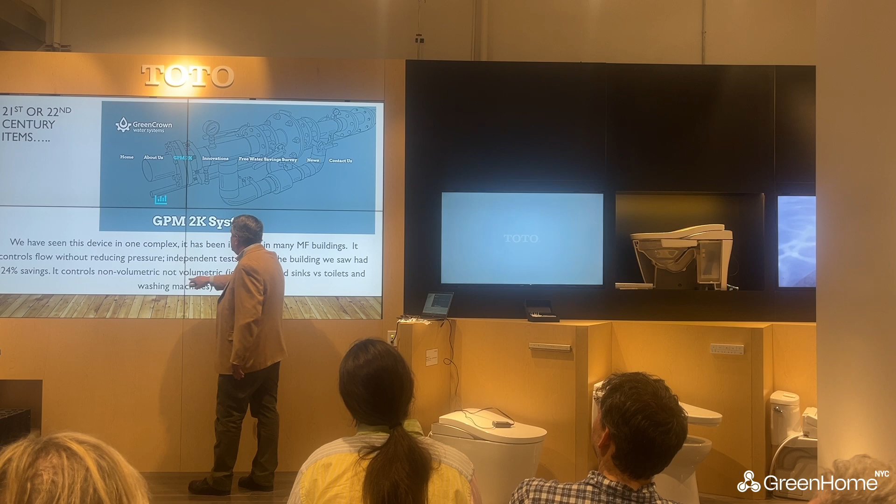It controls flow without reducing pressure, but it controls non-volumetric, not volumetric - like showers and sinks versus toilets and washing machines. This building had changed all its toilets, low-flow shower heads, faucet aerators, and they put this thing in and got 24% additional savings. And I call these guys up and I want more information, I want to talk to them.

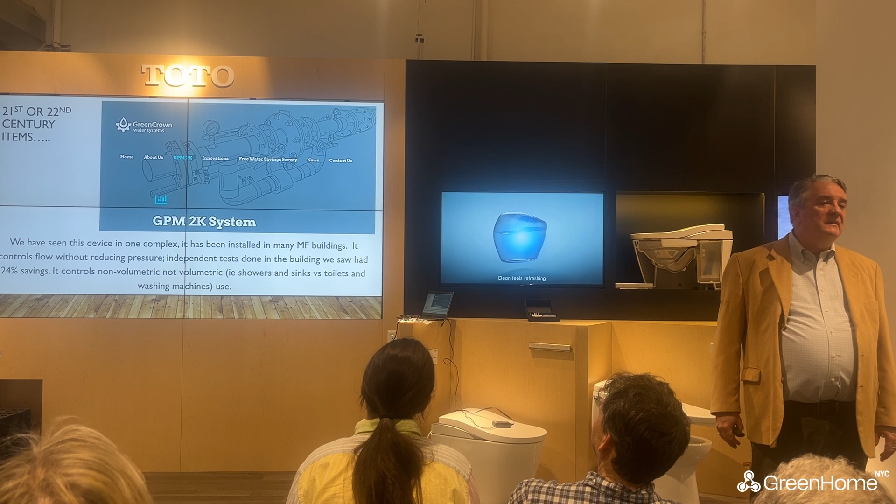6 months to return my email. 'Oh yeah, we really want to market this more, but we're really busy with another product.' What's your other product? 'We have a water purification system that makes water exactly like New York City water.' So pizza kitchens in Florida are buying it so that their pizza tastes like New York pizza. I'm not kidding.

Yes, if it's the 21st century, we can do stuff like this. When the Solaire was built, I was one of the first people to tour through it, because the company I worked for then did the LEED certification.

This building's pretty good - it has a stormwater collection system that holds 10,000 gallons of stormwater in the basement. It retains that water and it's used for irrigation in this whole park, and in the gardens here, and in the gardens up here. The system was sized to accommodate the irrigation requirements of the site, which is this building and the building behind it.

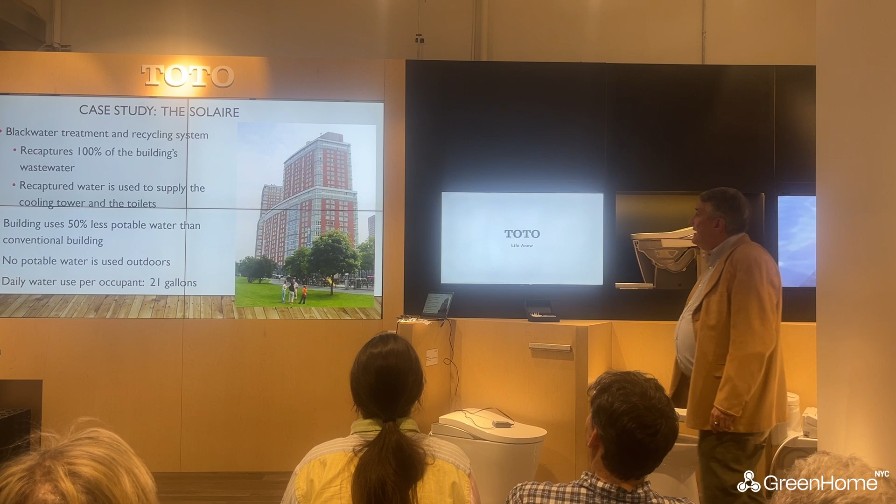If you ever see this picture in any publication of the Solaire, it's my picture, and everyone in the United States stole it. Further, they have a black water treatment system.

That's the water that has the poop in it. It goes all the way to the bottom, it recaptures it. They use the recaptured water after it's cleaned and purified for the cooling towers, and it's used in the toilets again. But the building uses 50% less potable water than conventional buildings.

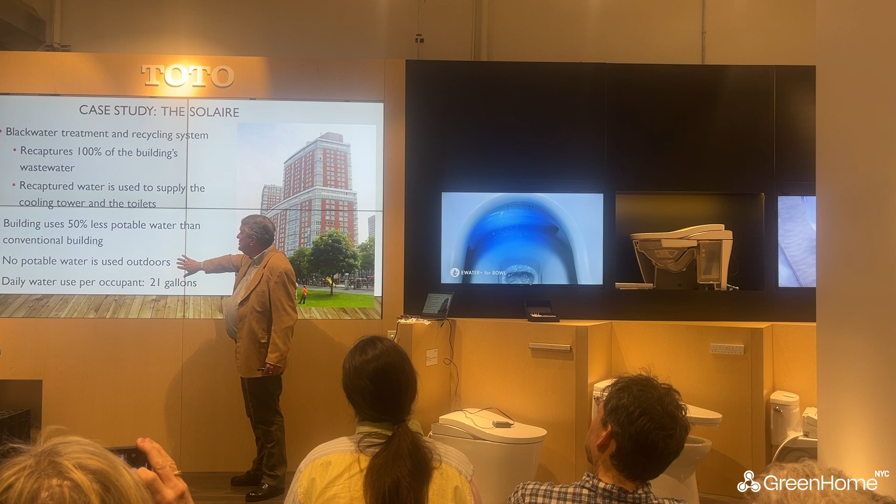No potable water is used for outdoor use. They use 21 gallons per occupant. After they filter that black water and bring it up to the top of the building, there's a tank. Right next to the tank, they have a cup holder. And they say, would you like some black water?

And I'm like, sure. The super drinks one, and I drink one, and they're all Irish guys, so we had a shot of whiskey beforehand. I'm of Irish extraction, so I can make fun of the Irish.

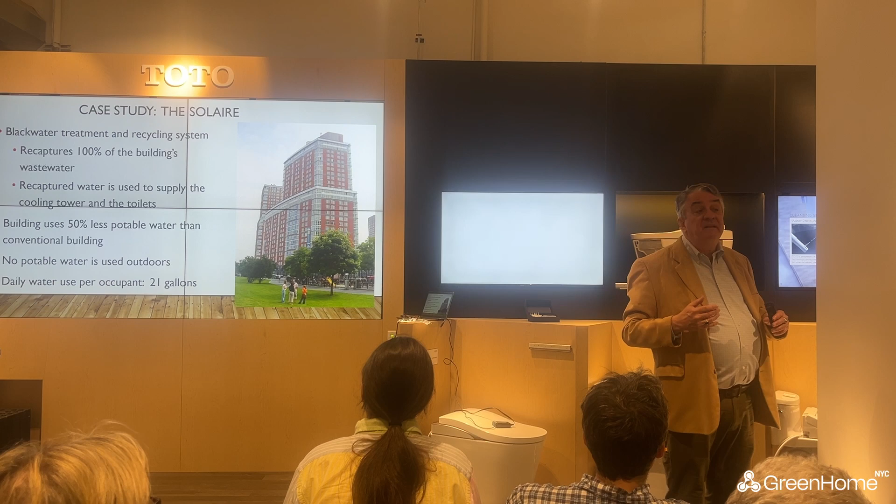But this water is completely clean. It's filtered.

We have wastewater treatment plants all over the city. You know what we do with them? You know what waste has in it? Methane. You know what we do with that methane? We flare it.

Those are our waste treatment, these are our resource recovery facilities. Now they're dumping compost in them as well because they don't know what to do with the compost. In one plant, they're recovering the methane. Way to go. But some environmentalists tell me, well, we have to get off gas because there's methane in it. What are we doing with the methane in here?

I was taking the train home to New York City on Amtrak, and right after we got by Yonkers, Yonkers has their waste treatment plant, right past the train, just south of it. On a dark night, there was a gas flare that was this tall coming off the waste treatment plant. That's straight methane burning into the environment.

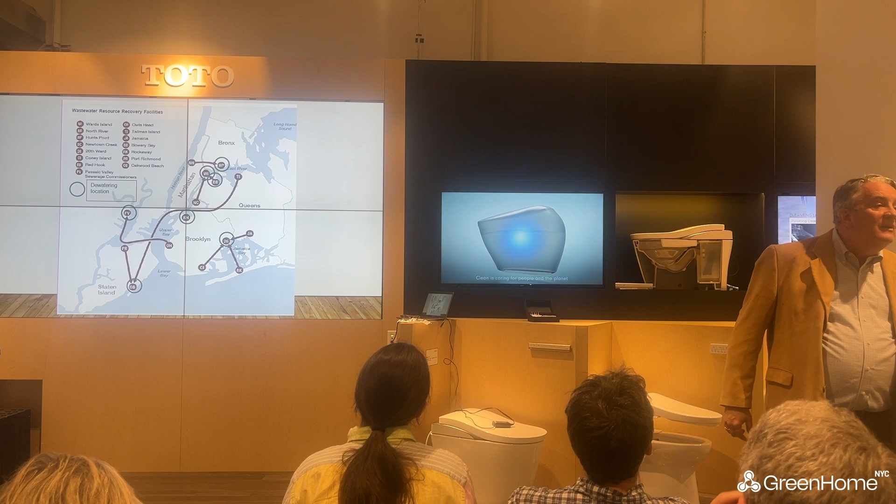Nobody's recovering here, but guess what? The city's telling the guys that make my pizza, they can't use wood in their ovens anymore because there's too much methane getting into the air, too many particulates. Let's talk about this for a minute. This is a classic, do as I say, not as I do.

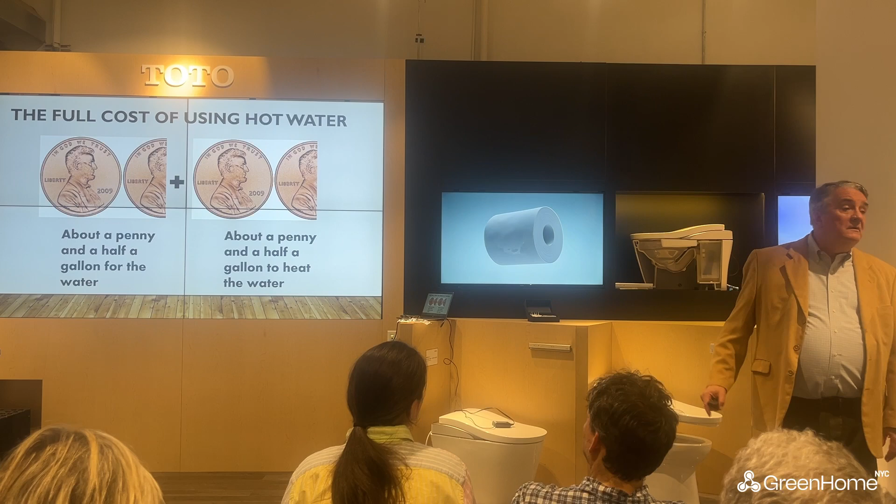And I have 100 of these. So the full cost of using hot water is about $0.015 a gallon for the water and about $0.015 a gallon to heat it, assuming you're heating it with a gas hot water maker. If you're heating it with a heat pump, multiply that number by 5, because a heat pump water heater is not as efficient as it says, and electricity is really expensive, for the record.

But on average, it takes about a half a kilowatt hour of electricity to deliver 1 gallon of water at a building, and it takes about a half a kilowatt hour of electricity to process 1 gallon of water in a sewage treatment plant. So 1 gallon is a kilowatt hour, except in New York City. Because in New York City, we have this fabulous engineering marvel that brings us the cleanest water in the world, and you all drink bottled water, and I think you're a bunch of dummies for doing it.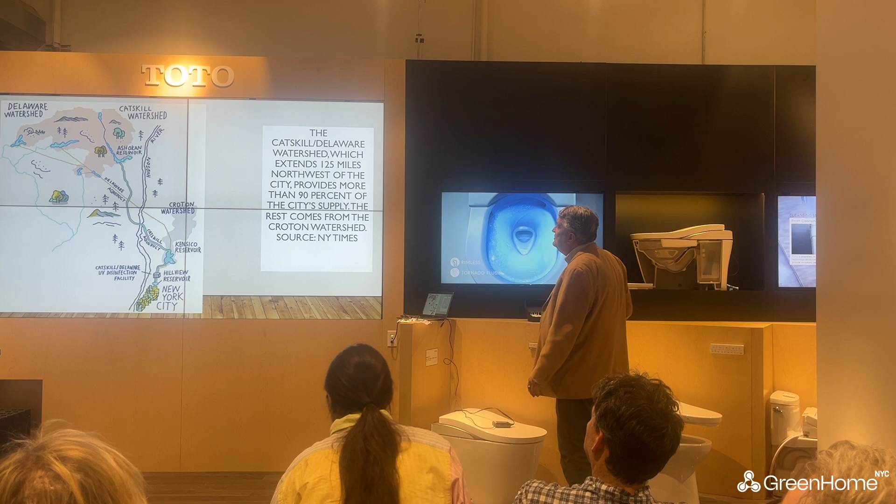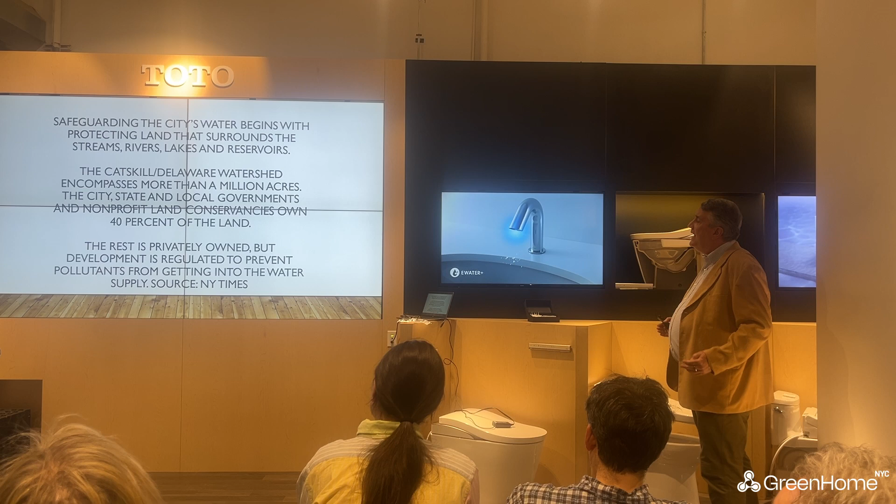Because it's the Catskill Delaware watershed, which is 125 miles northwest of the city, it gives us more than 90% of our supply. The rest comes from the Croton watershed. To safeguard it, they have to protect the land around the streams, rivers, lakes, and reservoirs. The watershed encompasses more than 1 million acres. The city, state, and local governments own, and conservancies own 40% of the land. The rest is privately owned, but development is regulated to prevent pollutants from getting into the water supply.

Like that. Like those pollutants. The city has upgraded the septic systems and wastewater treatment plants in communities around the watershed and helped build municipal salt sheds and manure sheds on dairy farms to prevent harmful runoff.

The Federal Environmental Protection Agency exempts the water originating in the Catskill Delaware watershed from its usual filtration requirements, a dispensation the agency gives to only a few other major cities. In other words, our water tested by the EPA says, nope, you don't have to filter it. It's super clean.

The 92-mile-long Catskill Aqueduct, which goes underneath the Hudson River 1,100 feet, was constructed a century ago. It can take anywhere from 12 weeks to a year for the water to wind its way to the city from the streams, tunnels, and dams. And it gets there by gravity alone. What an engineering marvel.

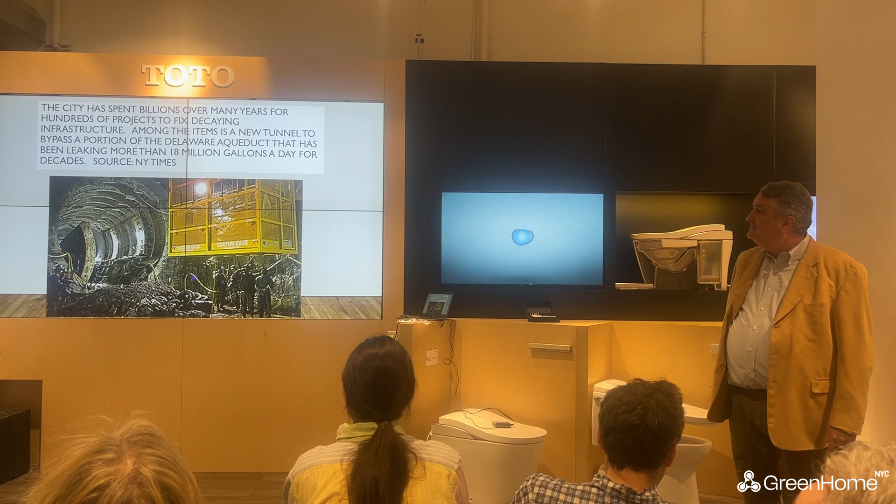But some of those decaying waterways are leaking more than 18 million gallons a day. Now it's leaking back into the aquifer, so it's not a terrible thing, but we should be managing this.

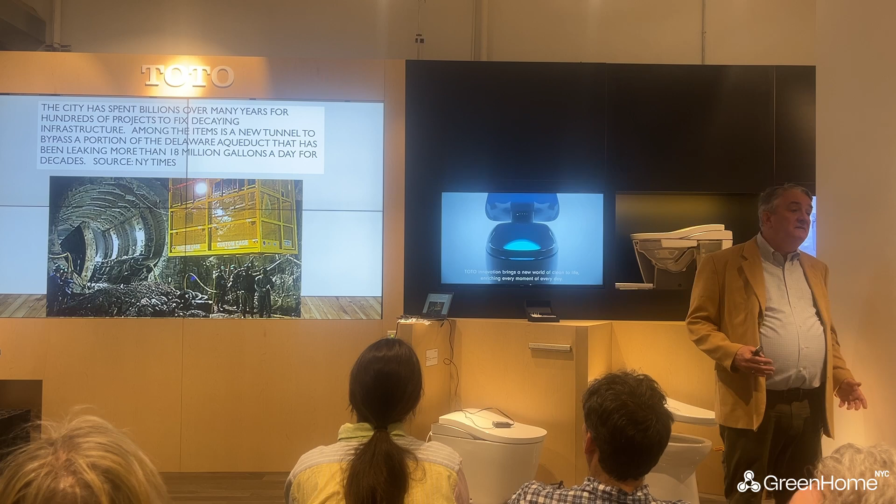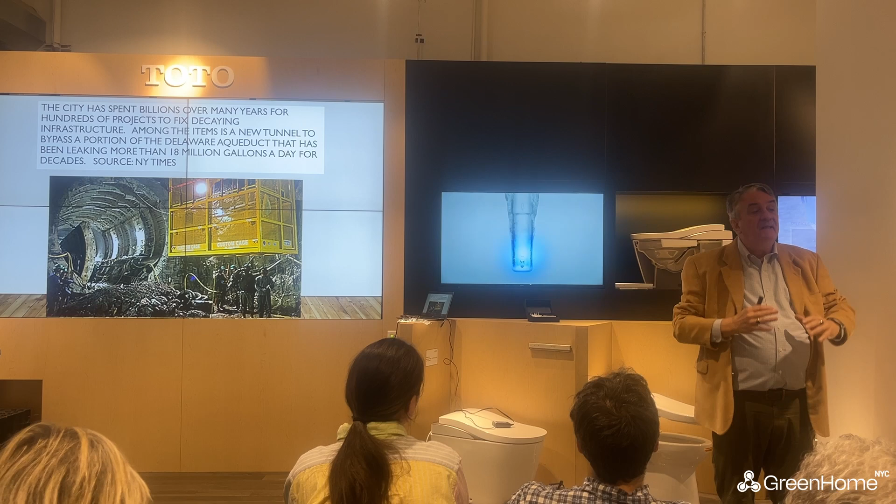So to solve this, we're building a new tunnel. For the last 10 years, DEP has told me any day now we're going to open it. It runs right down 10th Avenue, and one of the stations by it is right near my house. So I see the work happening on it, but we haven't gotten it yet. As soon as we open that one and close another one that's leaking, all of the tiles in the one that's leaking that have been held up by water pressure are going to completely collapse. And then we have another 40-year construction project of replacing the water.

The Hillview Reservoir is the last stop. It's like a 900 million gallon bathtub. That gives us enough water to supply the city for a day. We went down below 1 billion gallons about 20 years ago.

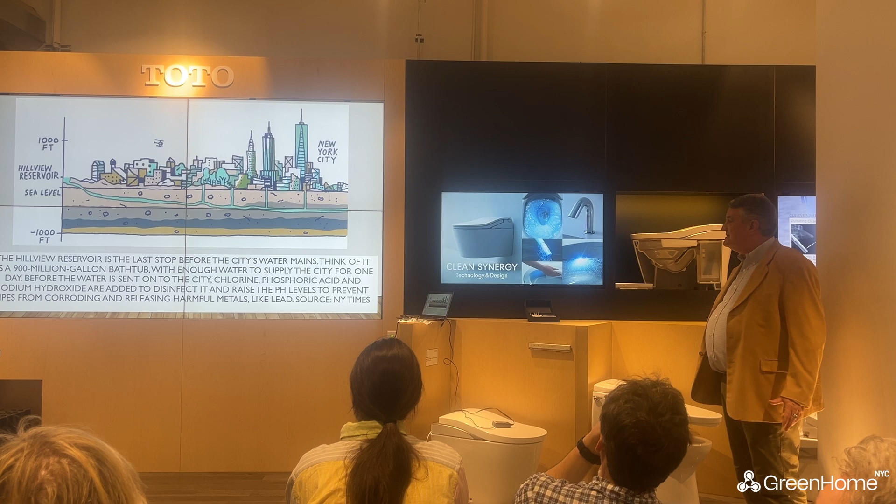They put chlorine, phosphoric acid, and sodium hydroxide to disinfect it, raise the pH levels, and protect the pipes from corroding and releasing harmful metals like lead. I hear from people all the time, oh, the city pipes are lead. No, actually, they're not. They've been replacing them for decades.

That's our water. But that's not where we use most of our water. No, I'm sorry.

In 2010, which used more water each day, the city of New York or the Indian Point nuclear power plant? This is a loaded question. How many think the city of New York? You're wrong. Nuclear power plants use tons of water, and they dump heated water into the Hudson River for decades, which caused algae blooms all in the Hudson.

Power plant water use is the water taken from the surface or groundwater source. In most cases, some fraction of that water is returned, but water consumption is part of that withdrawal water that isn't readily available for reuse because it's evaporated. So thermoelectric plants use a lot of water. Irrigation uses a lot of water. Drinking water uses a lot of water.

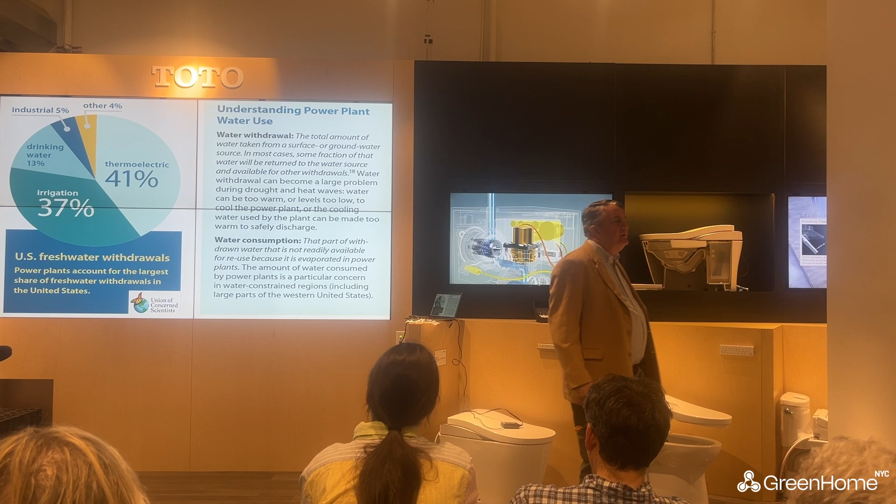In Georgia, the nuclear power plants during a drought about 5 years ago were a day from shutting down because they wouldn't have enough water to cool them. And Georgia is highly dependent on nuclear power. That's withdrawal. So utility consumption is very small compared to domestic and irrigation.

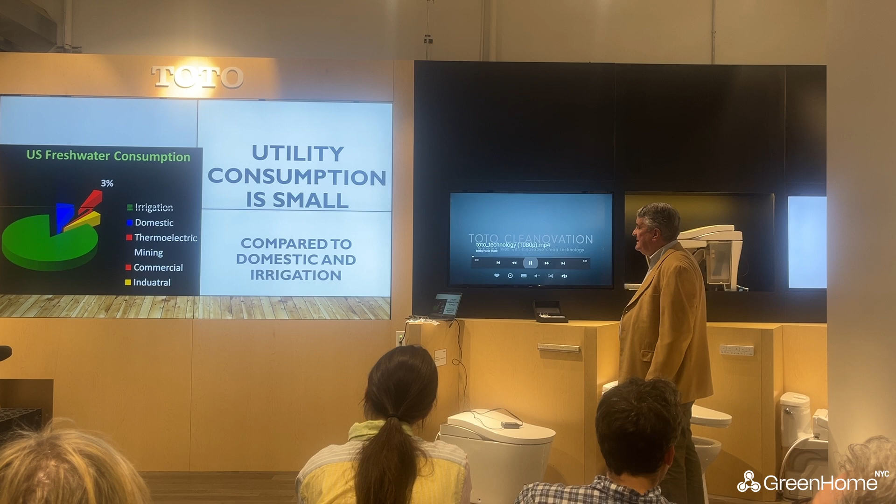That's consumption. I don't know if this is going to work. I use this again. I'm hoping this works. Let me turn the volume up on this. Just give me a second. Oh, it won't work. One more try. Control click, did you try that? Open link, you can do that. Open mic, where? Go down, yeah, to the right. Here. It's okay, I can give you a hotspot if you want. It's okay, nope. This was just a little thing that we had on nuclear power.

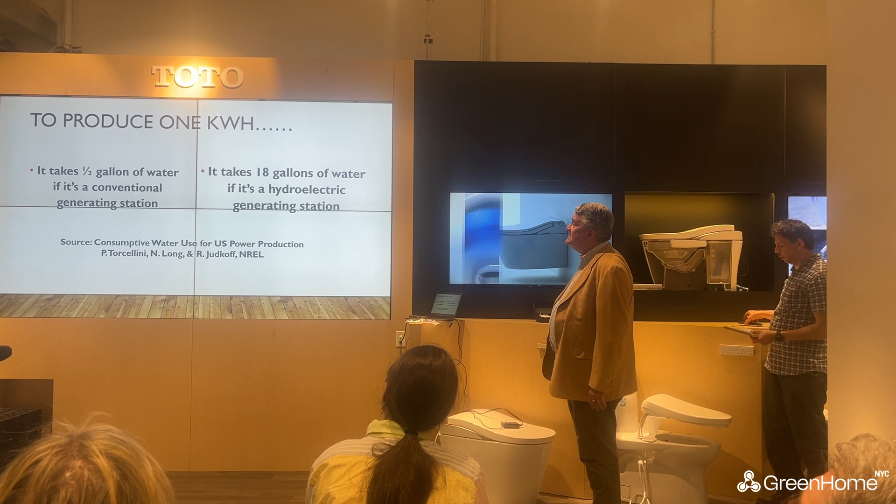To produce 1 kilowatt hour of electricity, it takes half a gallon of water if it's a conventional generating station, 18 gallons if it's hydroelectric. You don't lose those 18 gallons in a hydroelectric. So that means that if you have a coffee pot with a hot plate on it, it uses 3 quarts of water per hour. 20 incandescent hot 100 watt bulbs use a gallon an hour.

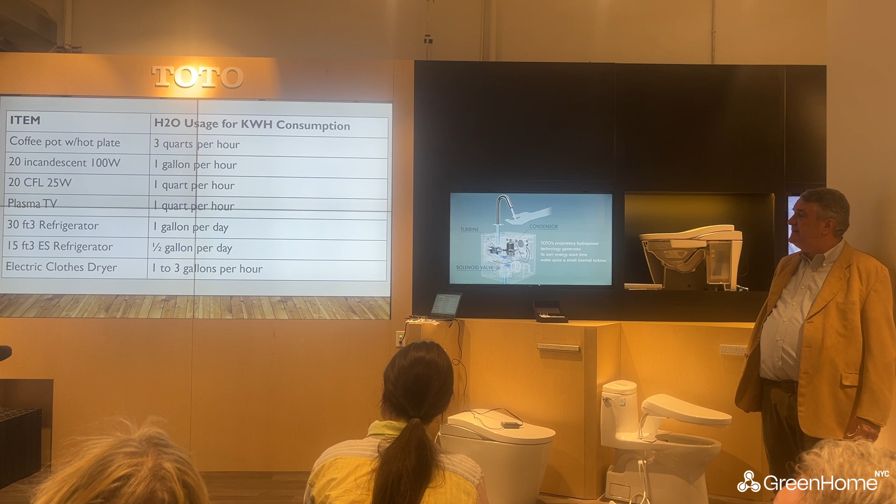20 CFLs use a quart per hour. A plasma TV uses a quart per hour. A 30 cubic foot refrigerator uses a gallon a day. A 15 cubic foot Energy Star refrigerator uses half a gallon a day. Electric clothes dryers use 1 to 3 gallons per hour.

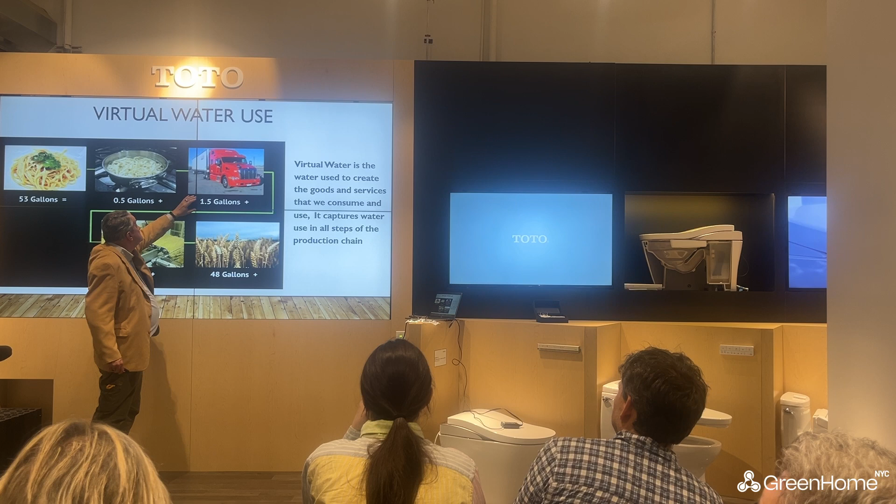We have to look at virtual water use. If I take wheat, which takes 48 gallons to produce, process it into pasta using 3 gallons of water, ship it via truck costing 1.5 gallons to reach the supermarket, and use half a gallon to cook it, it takes 53 gallons of water to make a plate of pasta.

So the thing here is drink beer, not wine. Beef is really bad, and one of the worst things I do for the environment is I'm not a vegan and not a vegetarian. That consumes probably the most water I use. A fast food burger takes about 2,700 gallons. 3 Starbucks coffees, 178 gallons of water. 3 Starbucks 16-ounce teas, 43 gallons. Yes, tea uses less than coffee. A beef-eating diet per day uses 1,300 gallons. A vegetarian drops to 650. A vegan drops to 89.

But 1 pound of almonds uses 2,000 gallons of water.

I swear to God, I'll give you this presentation. You don't have to take pictures. I promise. If you're signed up for this, you will get it. Is that right? Okay.

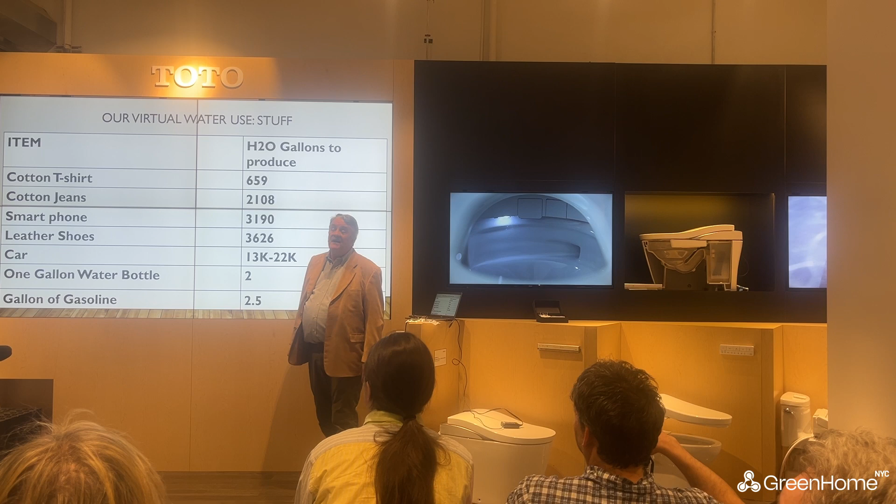A cotton t-shirt is 659 gallons. Cotton jeans are 2,100 gallons. Your smartphone is 3,000 gallons. Your leather shoes are 3,600 gallons. I wore my leather shoes today, I only have 2 pairs, the rest are sneakers and hiking shoes, so I'm a bad example today. A car takes 13 to 22,000 gallons of water. A 1-gallon water bottle takes 2 gallons of water to make it, not to fill it, to make it. Still want to buy that bottle of water? Keep it up. A gallon of gasoline only takes 2.5 gallons of water.

I want you all to focus on positives. Every day I'm going into a building and fixing things, making buildings more energy efficient. I didn't show all the buildings where we had fantastic results of 50% savings at the Auburn Housing Authority. The head of the Auburn Housing Authority wrote me a 2-page thank you letter because the cash flow in the building improved so dramatically that the vacancy rate went from 25% to 3% in a month. That's cash flow. This is energy efficiency, this is building buildings better, this is retrofit. We're all about retrofit, okay? Anybody that talks about LEED or Energy Star, I love all the certifications, but they don't save energy.